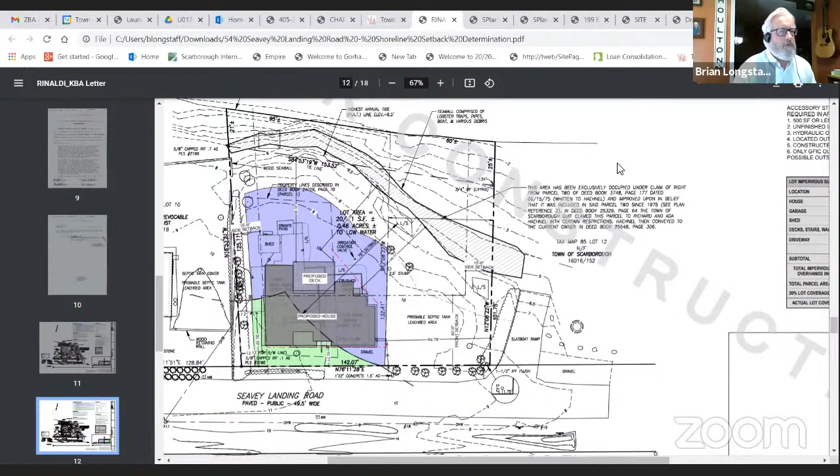Excuse me, Mr. Chair, can everyone see on the screen the plans for this project? Yes, they're up on my screen. Just wanted to make sure. Thanks, Brian. I'll put it to the board. Does the board have any questions at this time that they would like to ask while we have Mr. Browne on the line?

Pardon me, Mr. Chair. Mr. Karen: Just for clarification and the record, Mr. Browne, when developing this plan, were there other considerations or locations taken into the planning?

Not really, because there's only a little triangle of the lot that has the ability to be 2 stories, and the goal for the house was a 2-story house for at least part of it. So we really were trying to nestle it in as much as we could into that corner where we are allowed a little bit more height. So that's kind of where we decided. Plus, there wasn't really much room to go left or right anyway. But we can't really go any closer to the road.

All right, thank you. It sounds as if there was some thought elsewhere on the site, but that just makes the most sense. Other questions?

Well, I know we don't really have any criteria specifically for this type of determination, but I do know that when I look at it, we're supposed to be determining what I feel like somewhat our criteria, which is the size of the lot, the slope of the land, the potential of soil erosion. I just want to make sure that we are addressing all those this evening. I did get a chance to review the application and the information in it, but I just wanted that we could comment on real quickly, I think for all the board, some sort of criteria here in regards to, I'm just looking at the second page of Brian's memo, which lists out the zoning board and this designee shall consider the size of the lot, the slope of the land, the potential for soil erosion, the location of other structures on the property and on adjacent properties, the location of the septic system. And I know that this was a task that was pushed over by planning board. And one of the things is vegetation to be removed and to be relocated. I know that was a big thing with planning. So maybe if they could briefly speak to all those, I think that might be helpful.

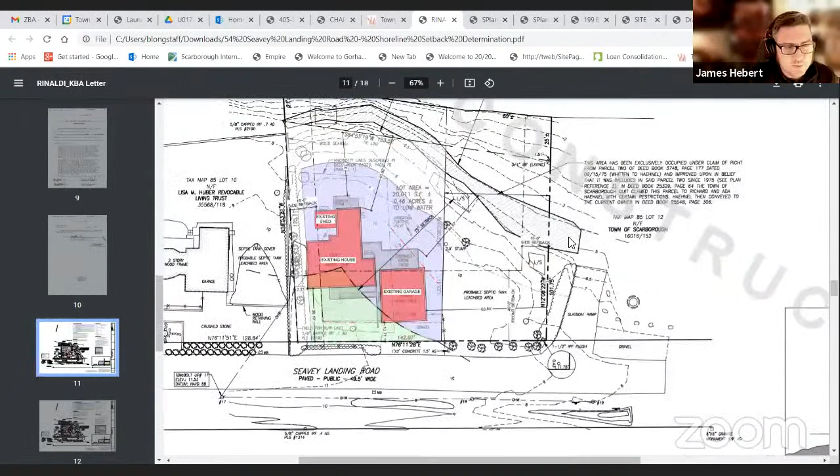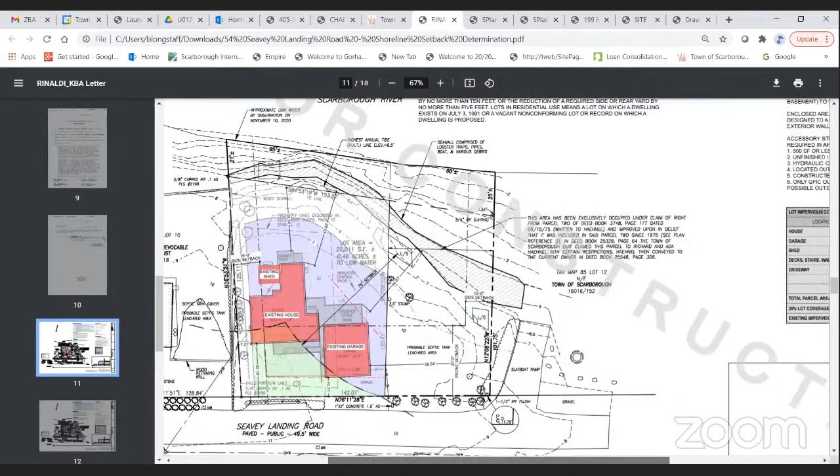Sure. Yeah, I think with the survey, you could kind of see where the topography slopes down once you get closer to the water. Where we've located the house is similar to where the house is located now. And some of the other things we have with this is we're not disturbing soil outside of where the existing footprint would be, is the goal. And as construction would start, we would be following all the erosion control measures that we're bound by with all this. But I think the goal was the excavation would really happen over a good chunk of the, once the existing house and garage are removed, you could see our new footprint kind of covers over most of that. So that was part of it.

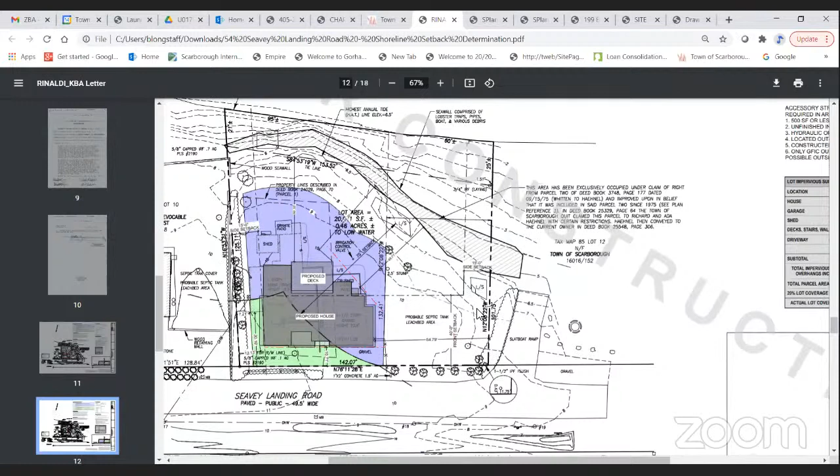And we did take the slope of the land into account - it's really the flattest where the house is currently versus if it was closer to the water, you start getting into more of a slope as it goes to the water. So those are some of the considerations that we took into account, not disturbing more of the landscape around the existing house than we needed to.

I have a question related to what is the foundation on the current building, and its condition. Can you describe that a little bit further? Yeah, the existing house has a full foundation under it.

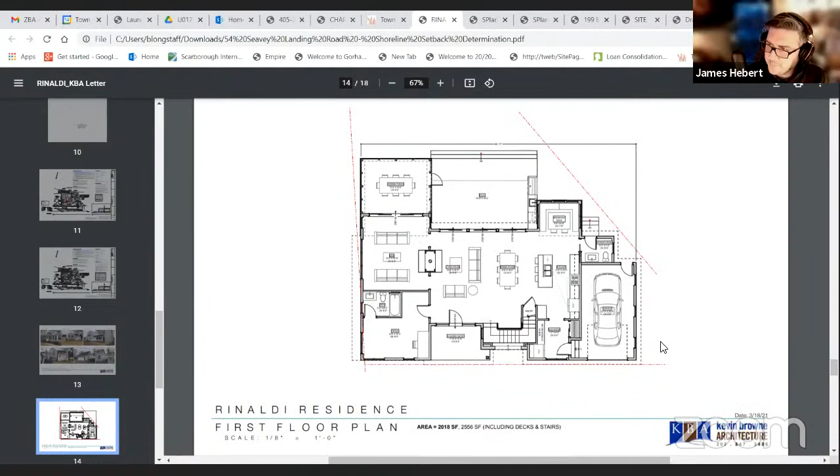The garage, I believe, is just on the slab. There's some extra structures that you can see in the pictures here that have been added on over the years. But the existing house does have an existing full foundation, which we would be removing and putting basically, I think it's going to be on piers, either piers or a very low foundation - with the flood zone, there's certain foundations that are allowed. Yep, so that's kind of what we're going to be putting back. Okay.

Other comments or questions from the board?

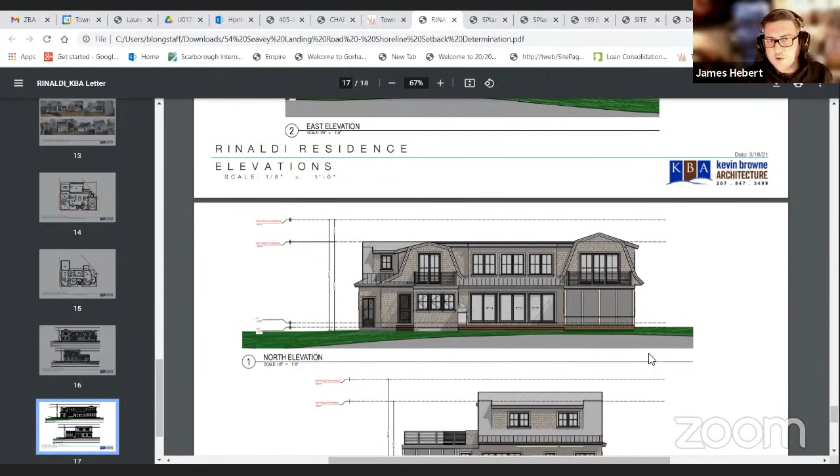I think one item worthy to point out is that it appears, Mr. Browne, that you're trying to make the new structure that is coming in less non-conforming than the existing structure. Is that correct? That's correct. Okay, and that's something that with a lot of these older properties we like to see on the board. It's just an effort to make a non-conforming structure less non-conforming.

Does anyone have any other questions or comments from the board? Okay, seeing none. Mr. Longstaff, at this point, do we check if there are any letters written from the public on this? You can do that now, or you can do it when you open the public hearing. I can tell you that we received no phone calls, no letters, no emails on this project.

Okay, and I guess with— yes, sorry, Ms. Shupe? No, it's okay. Someone's raising their hand as an attendee. I don't know if that's on purpose. That's okay. Well, I was just about to say we can open the public hearing right now, so if there is someone in the Zoom chat that would like to discuss, we can bring them in if possible. And their hand is down and they're gone.

Okay, seeing no folks from the public who would like to speak on this, I guess, Brian, our next steps with this would be—is this a straight up and down vote on the setback determination? Yeah, I think you can go member by member and gather comments and their thoughts on whether or not this proposal meets the setback to the greatest practical extent. And that would require a motion, a second, and a full vote. Is that correct? Yes. Excellent.

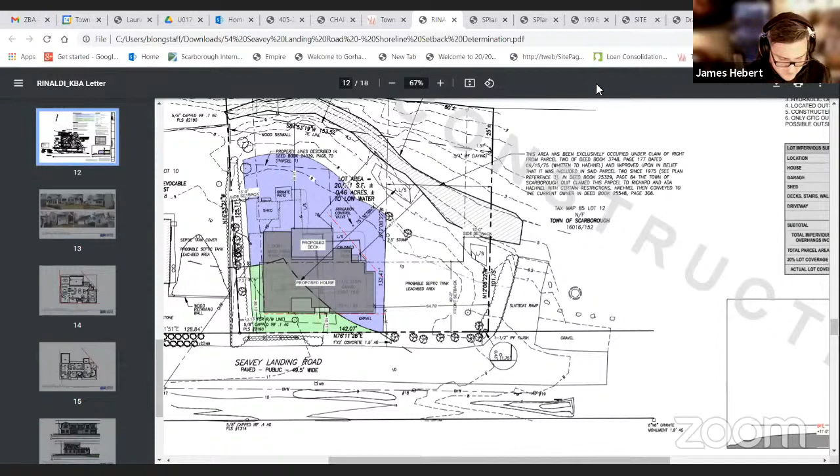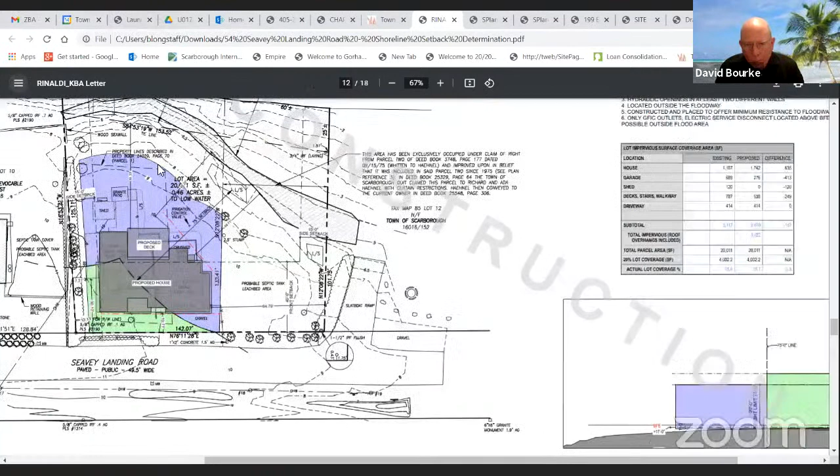What I'll do is go through each member for their comments on the setback determination for the record and their vote. So, Mr. Bourke? Yeah, I think this certainly improves the location of the building and also brings it up to code. So it's a significant improvement over what's currently there. It actually brings it further away from the shoreland, the problems. So I think in every way, this certainly meets all the criteria that we are looking for.

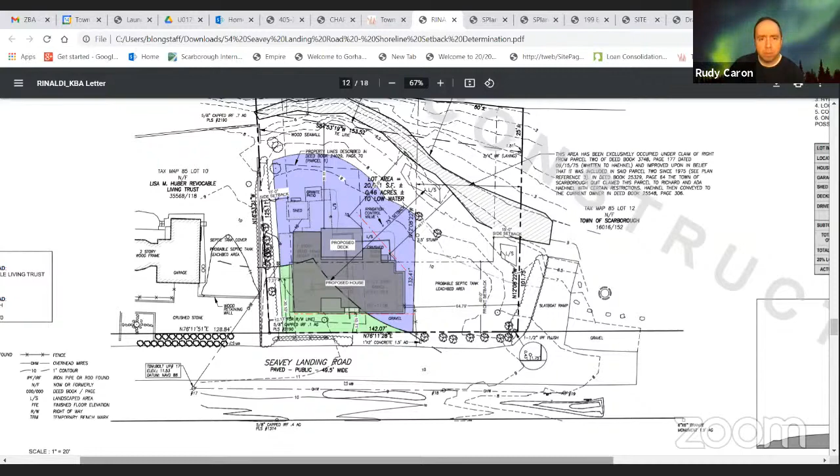Mr. Caron? I too believe that this meets the criteria as discussed, as Mr. Bork stated, and there is a reduction in distance, a reduction in the footprint based on the sketch that we can see, the existing and the new on top, as well as a greater extent or distance away from the shoreland, the edge of the water itself. I'm in favor of this and don't have any concerns.

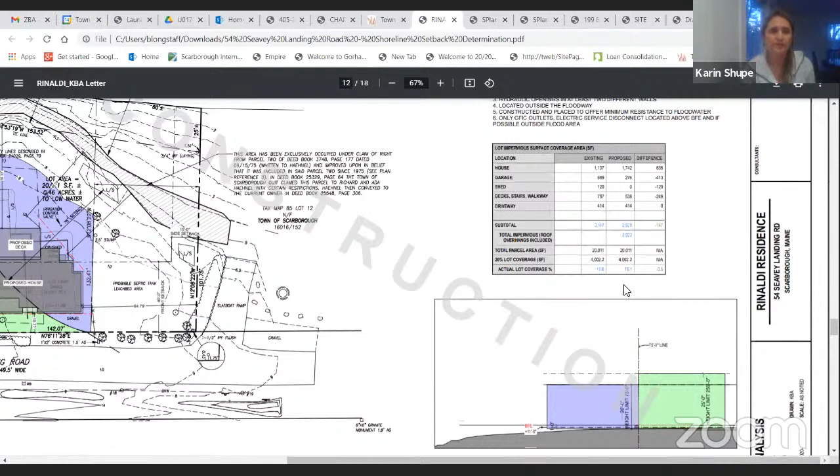Excellent. Ms. Shupe? Yeah, so I'm in favor of this and I will be voting yes. Anytime someone is trying to come more into conformance with the ordinances and the zoning rules that we have, that is great. They hired a professional firm and they've obviously done a lot of thought and process into what they need to do to use the best land they can. And I think, as we've seen, this is the trend with raising the homes and trying to get them farther away from the ocean and having them sustainable for longer.

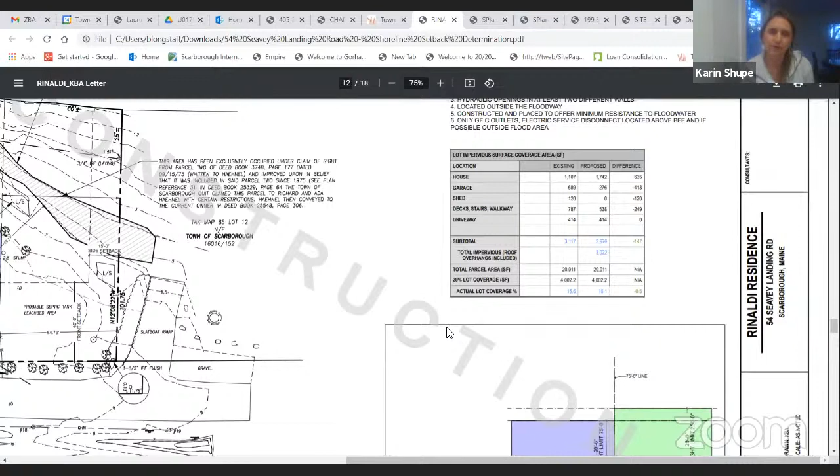So yes. Excellent. Mr. Howe? Well, I think it's been covered. I mean, a lot of work went into this and certainly an improvement further away from the water. I'm voting yes on this.

Okay, and Mr. Fralinger? Yeah, I'd reiterate what's been said, but I think it's important to note too, the lifting of the house and the base structure is now going to be conforming with the floodplain requirements, and obviously that's a key consideration for a shoreline setback, and I think it's a very thoughtful approach. So, yes, no problems. Excellent. Thank you, Mr. Fralinger.

And I will also agree with this because, as I previously stated, any non-conforming lot, any improvement to the lot that makes it less non-conforming is something we try to take into account when folks are trying to update their properties. So to maintain what we have done in the past, I will go through each of you for your vote.

Mr. Bork, how do you vote on this? Yes. Mr. Caron? Yes. Mr. Howe? Yes. Ms. Shupe? Yes. Mr. Fralinger? Yes. And I will vote yes as well.

So the setback determination passes, and you're all set, Mr. Brown, Mr. Rinaldi. Thank you for your time. Thank you. You're very welcome.

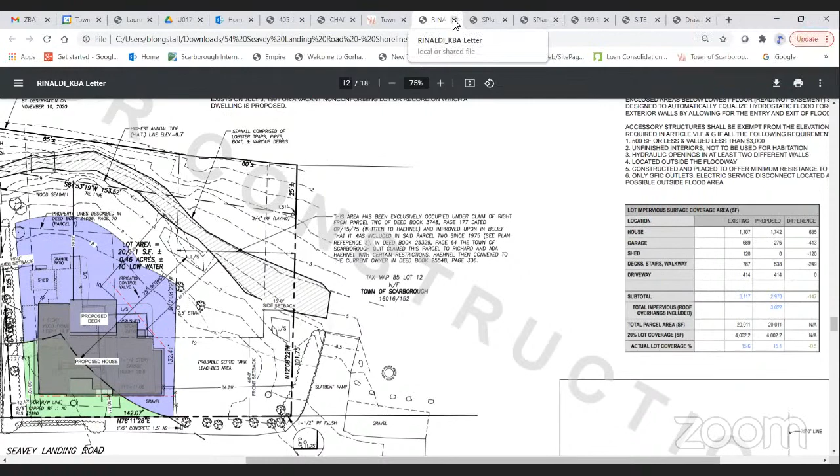Now, before we get started into the remainder of the agenda, I wanted to address one item I forgot to mention at the very beginning, just a few opening remarks as we go into these appeals. So forgive me for not mentioning this earlier. In each instance of the appeal brought before us, the burden is upon the applicant to demonstrate compliance with each of the criteria or provisions in the applicable appeal being discussed this evening.

The board is going to ask questions as necessary to understand the nature of the appeal as fully as possible. When all the testimony has been heard, the chairman, myself, will close the record, and the board will adopt findings of fact for each criteria of the appeal and vote to determine if the applicant has met the burden of proof necessary to meet that criterion.

It's important to know that if any of the appeal or special exception criteria have not been met, then the board must deny the appeal or application. In many cases, the applicant or landowner may have a personal problem which prompted the request for a variance. Please understand that this is not legally relevant to the appeal, no matter how sympathetic we, the board, may be to the appellant's situation.

After the board votes on each merit of each criteria, a motion may be made to approve the appeal, and if there is a second, discussion will follow. The board will then state conclusions of law based on the findings of fact to support a decision on the motion. In most cases, the board will request that staff prepare a draft written decision based on the stated findings and conclusions, as well as the audio, video, and supporting materials on the record for approval at our next meeting, as we demonstrated earlier.

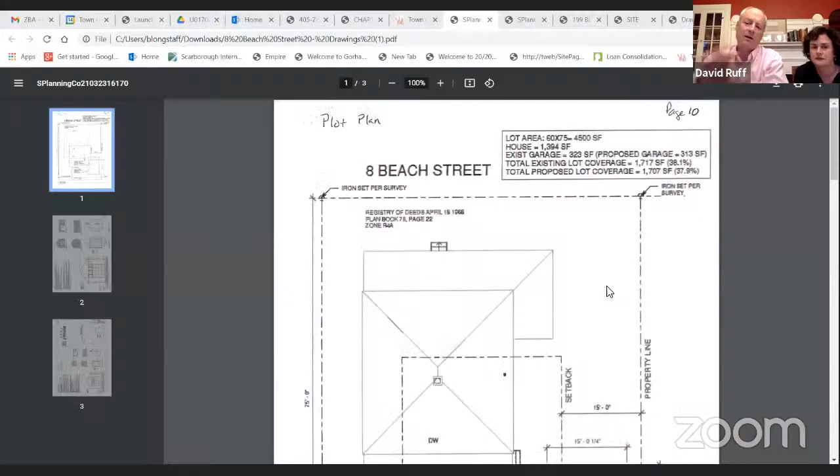I think it's pretty straightforward, as Brian had talked about. We started by trying to investigate the single car garage that's there, and off to the side, the kind of jut out is actually an old outdoor shower and 2 changing rooms that are all roofed over within the garage area, with the intention of repairing that, which would have been the simplest approach to take.

In consultation with Bill Royal, who is doing a bunch of the work on our house now, we really determined that the ability to pick up the structure, replace the bottom probably 18 inches of that, and pour a foundation, because it's sitting right on the sand at this point, was really not viable, because just the act of picking it up would probably cause the building to just fall apart. It's not all that well built there.

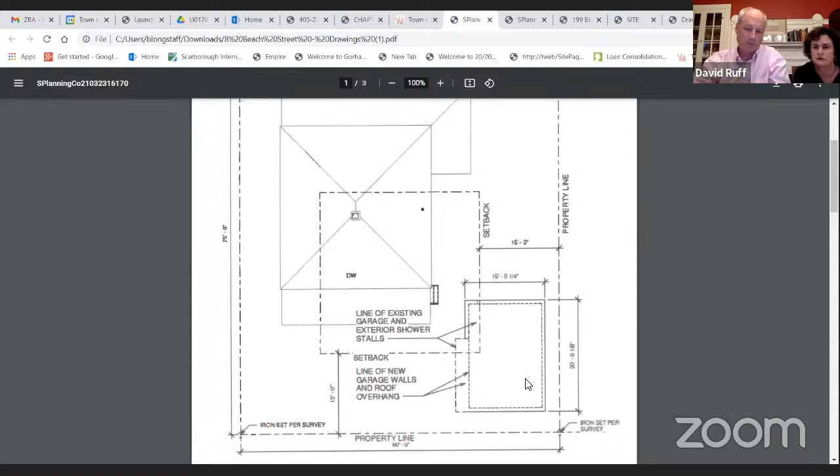We then met with Linda Braley, who is an architect who's drawn the plans that you're looking at. And through both of them, the suggestion was made to get rid of the odd piece that sits off to the side, slightly reconfigure the structure, as you can see in the plans, and essentially keep it in the same spot.

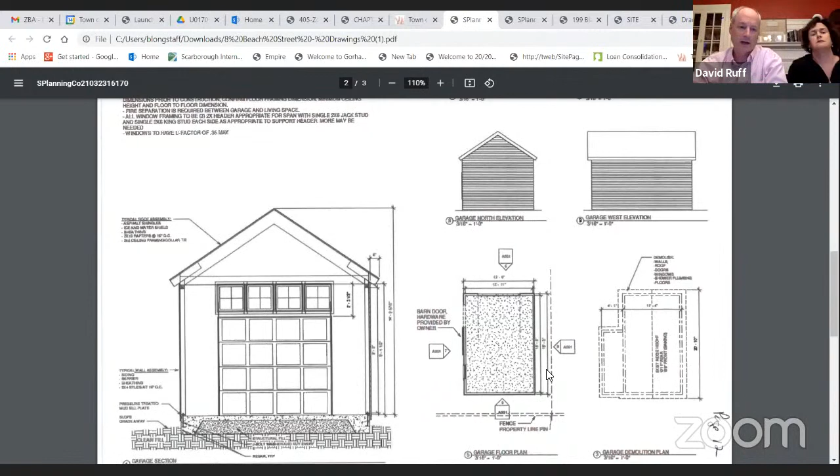So the wall on the side running parallel with the McCalman residence next to us would stay in the same spot. The wall in the back, up to the Guzzi residence, would stay the same. And then it would become slightly wider with the overall area, taking off those other pieces and slightly reducing the footprint on the lot.

I would say the major reason we're looking to go slightly wider is that the advice we've been given is that it would make the building actually a little bit stronger, because currently the width of the overhead door essentially takes up the entire front of that, so there's no real way to put any strength into it. By widening it a little bit, we get more strength so that we don't face the same problem as you can see in some of the pictures of both the rot and the tilt that has occurred.

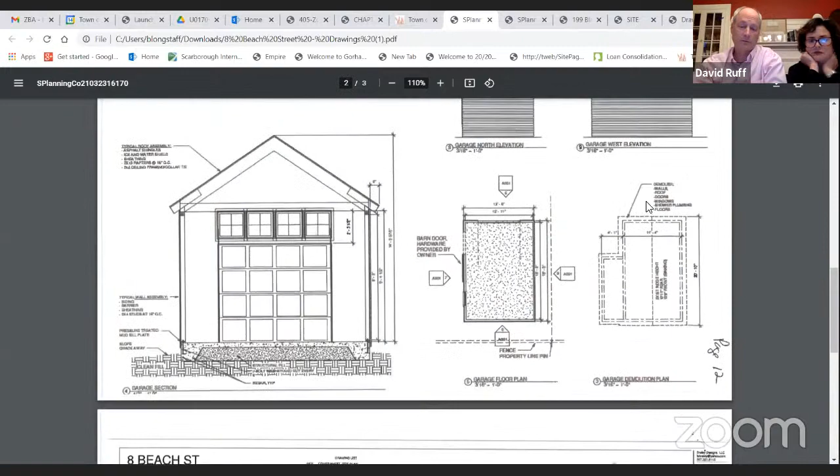Okay. Thank you for sharing. Are there any questions so far from the board regarding this practical difficulty application?

Okay, seeing none, what I'm going to do now, excuse me Mr. Ruff, is we're going to go through each of the criteria of the application one at a time. And what I'll ask is just you read your response into the record, just so that we have a recording of your response for the official record.

So question 1: the need for a variance is due to the unique circumstances of the property and not to the general conditions in the neighborhood. This variance is being requested due to the poor initial construction and current state of disrepair in this building. The general conditions of the neighborhood have not influenced the request, as we are largely maintaining the same location on the property.

Question number 2: the granting of a variance will not produce an undesirable change in the character of the neighborhood and will not have an unreasonably detrimental effect on either the use or fair market value of abutting properties. We will be replacing a garage already in existence. Two homes directly across from this location have garages of roughly the same square footage requested. The house on one side of this location also has a single garage. The house directly behind this location has a single garage. All of these garages exist in similar locations, largely out of compliance with current setback zoning requirements.

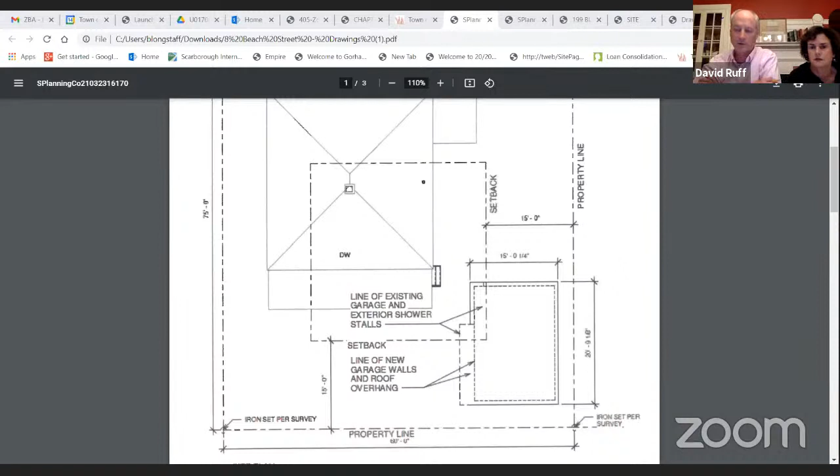Excellent. Number 6: the granting of a variance will not have an unreasonably adverse effect on the natural environment. Through a review of the GIS maps on the Town of Scarborough website, we have determined that the entire lot for 8 Beach Street is not in a flood hazard zone. Further, the location of the garage is not in a shoreland area.

Well, thank you. Number 7: the property is not located in whole or in part within a shoreland zone as defined in 38 MRSA section 435, or flood hazard zone as defined in the Town of Scarborough floodplain management ordinance. Yes, and through review of the GIS maps on the Town of Scarborough website, we've determined that the entire lot for 8 Beach Street is not in a flood hazard zone, and further, the location of the garage is not in a shoreland area.

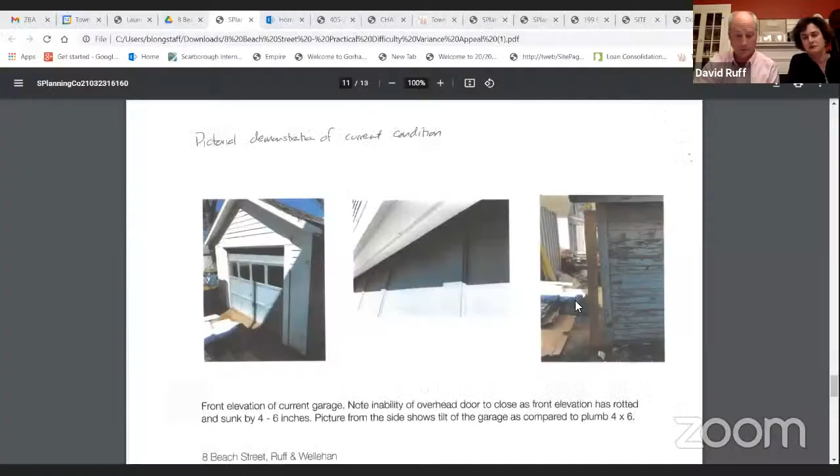Thank you. And number 8: please demonstrate how the strict application of the dimensional standards of the ordinance to the property for which a variance is sought would both preclude a use of the property that is permitted in the zone in which it is located, and would also result in significant economic injury to yourselves, the applicant. This property is currently a personal home, and we will not be changing the use of this property through this application. This property is permitted for home usage. If we are unable to get a variance to rebuild this garage, our use of this space to store and maintain various outdoor equipment would diminish. In addition, the property value would decrease significantly for future owners who would not have outside storage for various needs. We do not intend to change the uses of the property or the garage we are looking to replace.

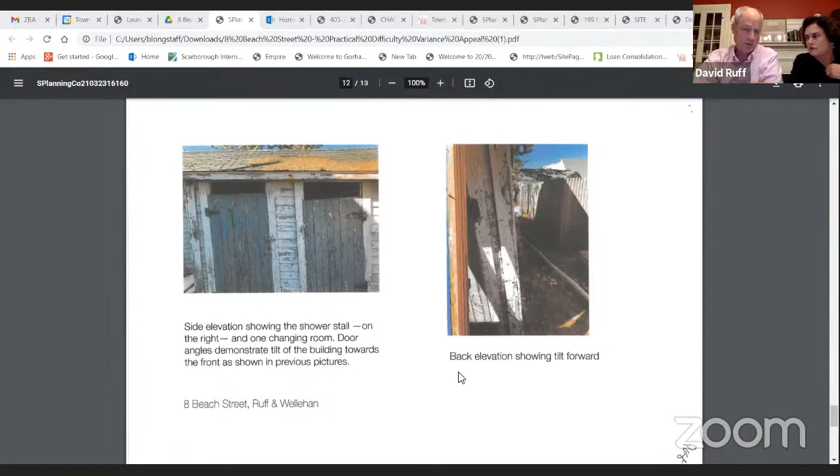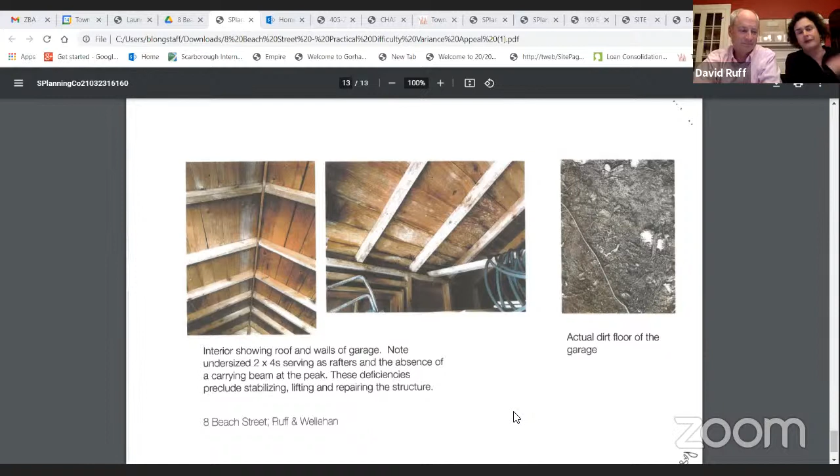Sure. So seeing as we're going to be in the same spot that it's at right now, it's not going to have any impact on the natural environment that's there. I can't argue that I am a naturalist expert on that, but I don't think it has any impact on animal usage or personal usage or anything along those lines. And we're not looking to change the dynamics of the ground there. It's actually going to be in the same spot where it is right now. And I think by reducing the footprint even that little bit, it's just more spots where the rain comes down. We'll be planting around it, and we'll add less roof zone and more green. I know in Scarborough that's very important.

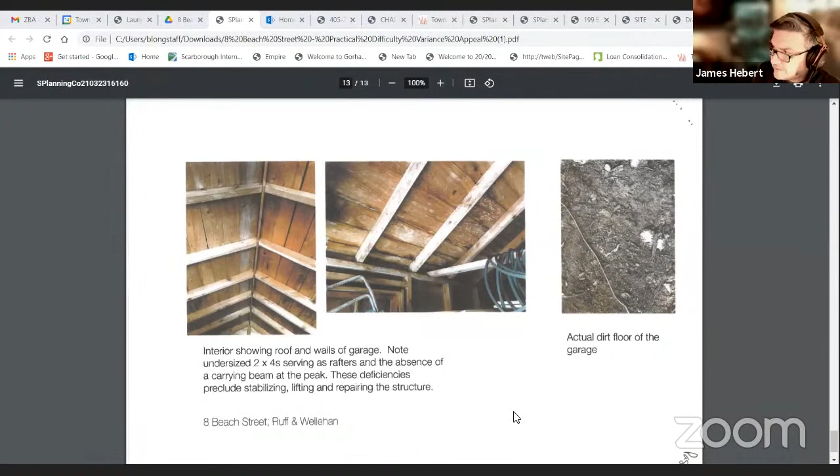Excellent, thank you. Following up on that, are you planning to have any running water, sinks, or drains in this garage? We are not. Okay, so are you planning to run electrical out there? We are planning on running electrical out there. Yep, that's fine.

So usually on questions like this, we want to see if the construction is going to have an environmental impact. If you were going to put in a sink, we'd want to know where that would drain. Seeing they're not having a sink here, that question isn't necessary.

If I might add, it could even be less than the current uses right now. There is an outdoor shower which is just drained right into the ground at this point. We haven't used the shower, but for years it's been running there, just running into the ground. Excellent, and that is being removed, you said? Correct.

Okay, are there any other questions from the board? Okay, thank you both very much.

I think now we will go into the public hearing portion of this application. Mr. Longstaff or Doreen, is there anyone in the public who would like to speak on this matter, or have we received any emails or letters from any abutters or folks regarding this application?

Yes, Mr. Chair, we've received three letters or emails on this particular appeal.

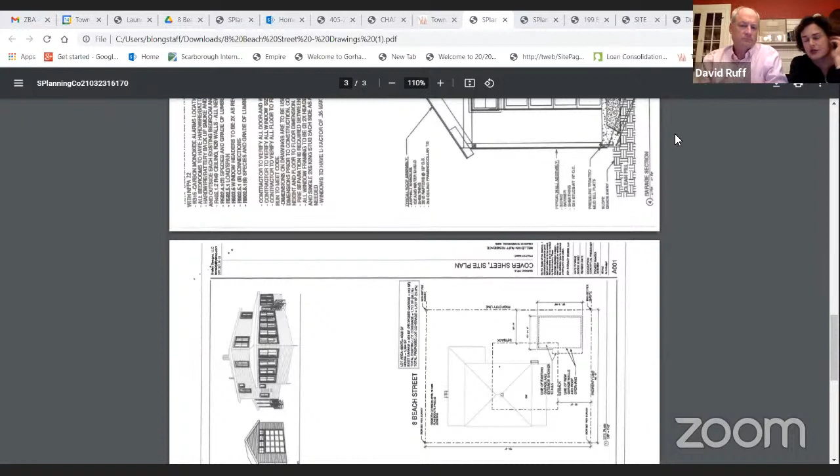I'm trying to remember, it's not on our property, so we wouldn't be touching it. It sounded like she was maybe worried about a root. Those pine trees have typically extremely shallow roots. We're not moving that edge of the garage at all. And she also has extensive gardens, and we want to be able to leave those right where they are, so I don't perceive that it would be a problem at all.

Okay, I'll take a poll from the board. Any last questions or comments for the applicants? Okay, seeing none, we're going to close the public hearing. Thank you both very much. Now the board is going to deliberate and discuss each of the criteria on the application.

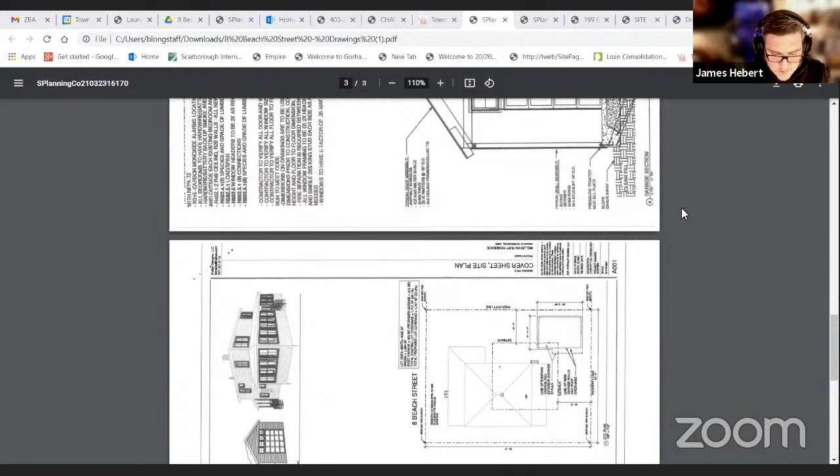So number 1, the need for a variance is due to the unique circumstances of the property and not to the general conditions in the neighborhood. We'll start with you, Mr. Bork. This is an extremely small lot, and I'm not really sure if all the lots in this neighborhood are the same size, but I will assume that this one is significantly smaller than others. So it is a unique property, if I can make that assumption. And when you look at the non-conformance on the lot, there's really not a whole lot you could do other than replace the 80-year-old garage with a new one. I think that seems reasonable. It's about the only action they have.

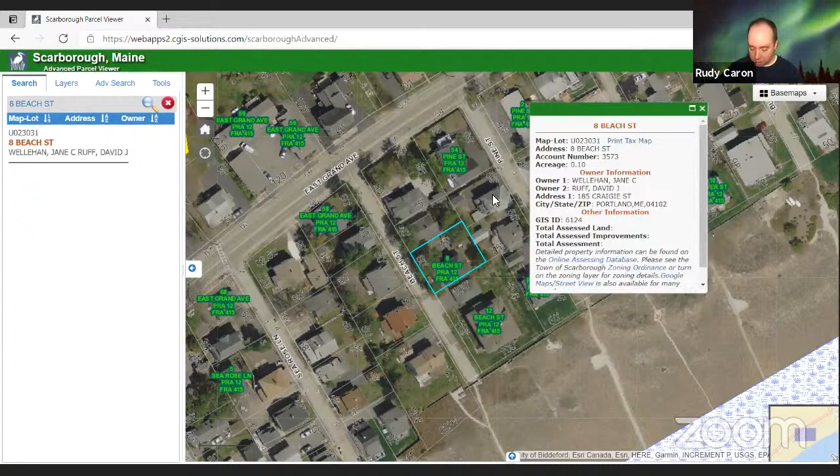Thank you, Mr. Bork. Mr. Caron? Are you also muted, Mr. Caron? Sorry about that, Mr. Chair. It's okay. What I was saying is that with the site plan provided and the documentation, it's clear to see that with the building setbacks on the existing site and the existing house and primary residence, it would be impossible to provide a garage, a single car garage, elsewhere on the site. So this does make sense, and as mentioned, it is a reduction of what is currently there.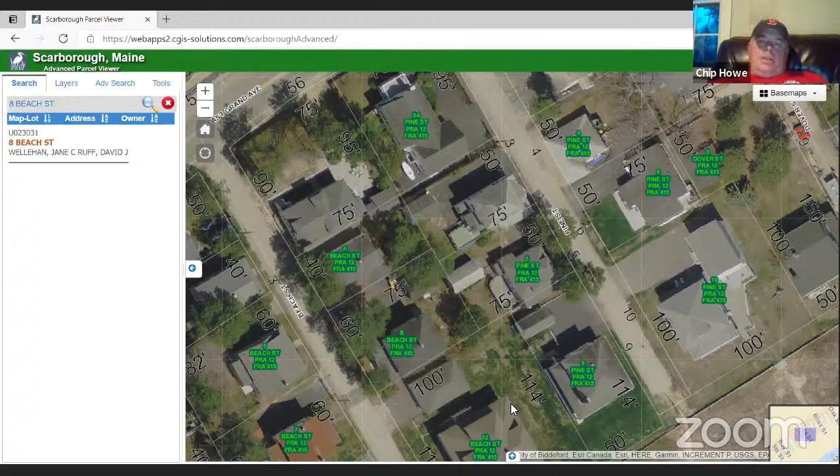Excellent, thank you. We'll go to Mr. Howe. Certainly an improvement. What's there is in pretty rough shape, and they're removing the shower, which is now draining into the ground. So that is certainly an improvement.

Excellent, thank you. Mr. Frolinger? Yes, I'd reiterate Mr. Bork's comments, but I also point out that for them to reconstruct any form of garage on the property would require some sort of a variance given the size of the property and the nature of the lot. So what they're proposing seems to be the only way to recover use of a building that is effectively in disrepair.

Thank you, Ms. Shute? I agree with most of what the board has said, and the applicants also provided photos of the current condition of the garage, which is unique compared to the other garages in the area at this time.

Excellent. I'll say the property is not unique in the aspect that there are many lots in this area that are non-conforming, no matter how you look at it. But it is unique in the situation where this is a building that is approximately 80 years old, not very well maintained through its later years, and therefore it needs to be replaced because it can no longer be effectively maintained. That response will tie into another question we'll mention later. But I guess, seeing that, we'll go on to number 2.

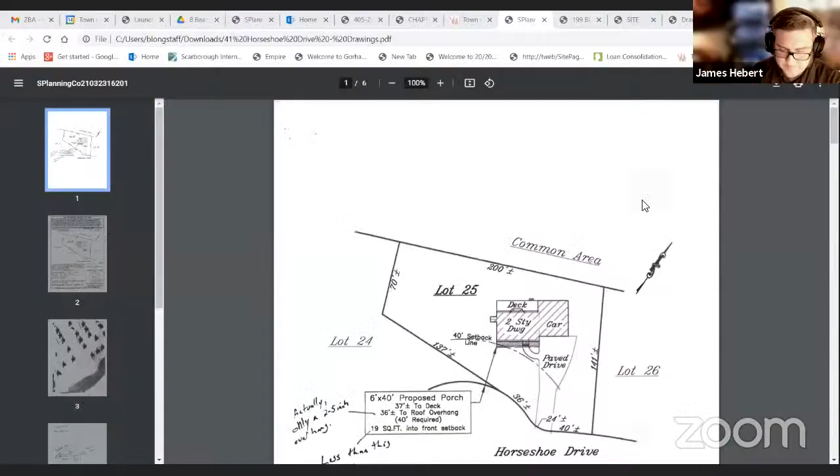Well, like Brian had said, just trying to add a farmer's porch to the front of the house, and we're on a cul-de-sac, so it just cuts off that left corner of it. If you're looking at the image right now, just trying to go through the process. Not sure what else to say about it, pretty straightforward. Sure, can you provide us with the exact measurement of relief that you're looking for here? For 4 feet. It's a 4 foot variance. Okay, excellent. Yep, thank you.

I guess at this time, what I'll do is go through all of the 5 criteria, and I will ask the questions, and you will answer them based on the answers that you've given us in our packets. That way we can read it into the record, so it's official. Number 1, the existing building or structure on the lot for which the limited reduction of yard size residential is requested was erected prior to July 3rd, 1991, or the lot is a vacant non-conforming lot of record.

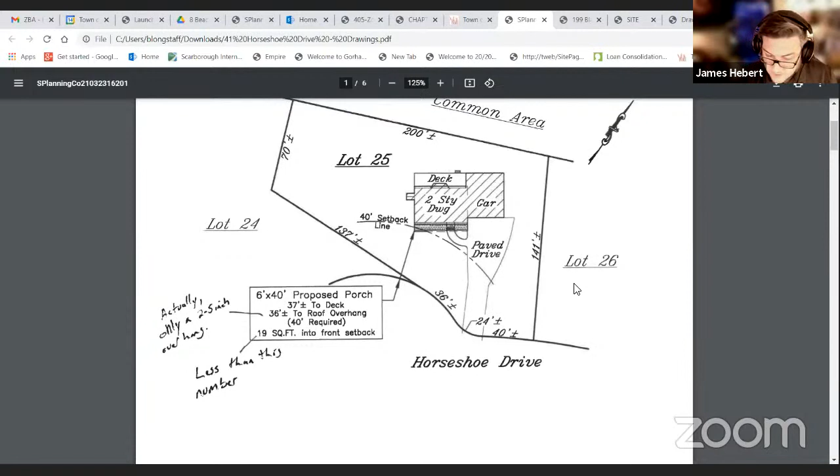And you could just read in what your response was. Yeah, I don't actually have that in front of me right now. So, in your application, you stated the home was built in 1986. Is that correct? Right, that's correct. I guess, do you have a copy of your responses in front of you by any chance? I don't, unfortunately. No, okay, I don't have it in front of me.

I guess going forward, we'll continue asking the questions, and I guess, Brian, do we restate what was provided in the application? And you're on mute, Mr. Longstaff. Yeah, I was just looking for the application myself.

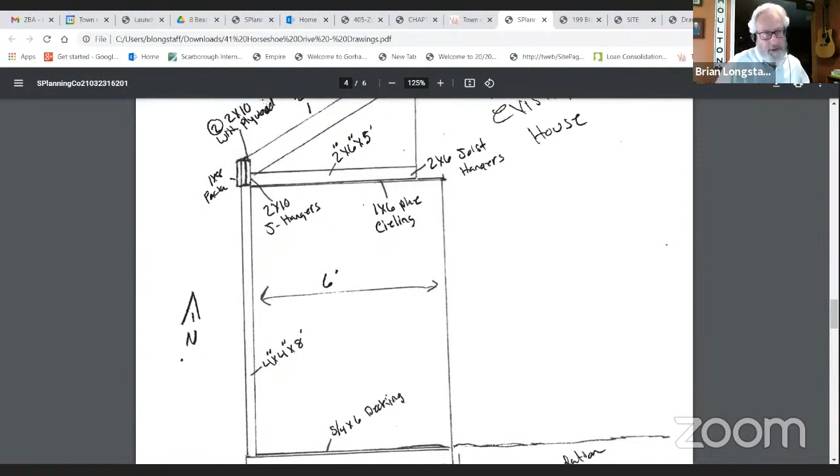Sounds good to me. All right, we'll move on to number 2, Mr. Hebert. The requested reduction is reasonably necessary to permit the owner or occupant of the property to use and enjoy the property in essentially the same manner as other properties in the same zoning district. Absolutely. One of the big reasons for this is so that we can sit on our front porch and watch our kids play, because they play in the front yard, not in the backyard as much. So we just want to be able to watch them and keep an eye on them.

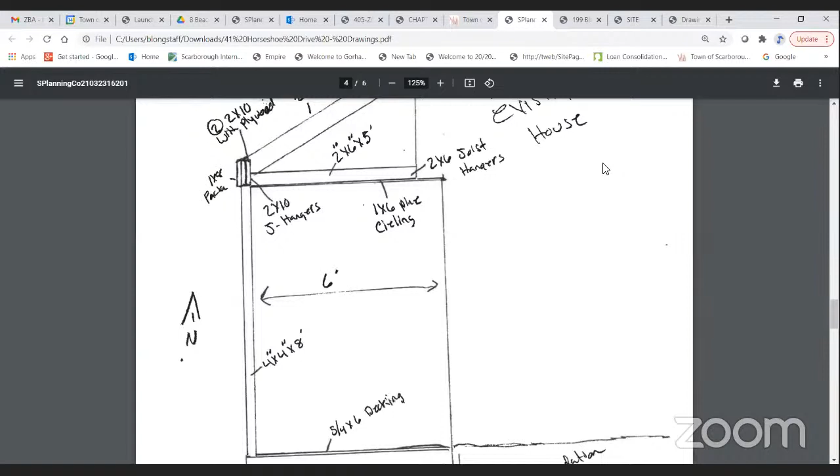Excellent, thank you. Number 3: due to the physical features of the lot and the location of the house on the lot, it would not be practical to construct the front porch or the enlargement to the structure in conformance with the currently applicable yard size requirements. Yeah, correct. I mean, because of the curvature of the cul-de-sac, it just cuts off that corner. It would just look silly if we didn't pull the front porch all the way to the end of the house.

All right, thank you. Number 4: the impacts and effects of the enlargement, expansion, or new building or structure on the existing uses in the neighborhood will not be substantially different from or greater than the impacts of a building or structure which conforms to the yard size requirement. Correct. Yeah, I think it's gonna look great. I frankly think probably other people in the neighborhood will want to do it in the future.

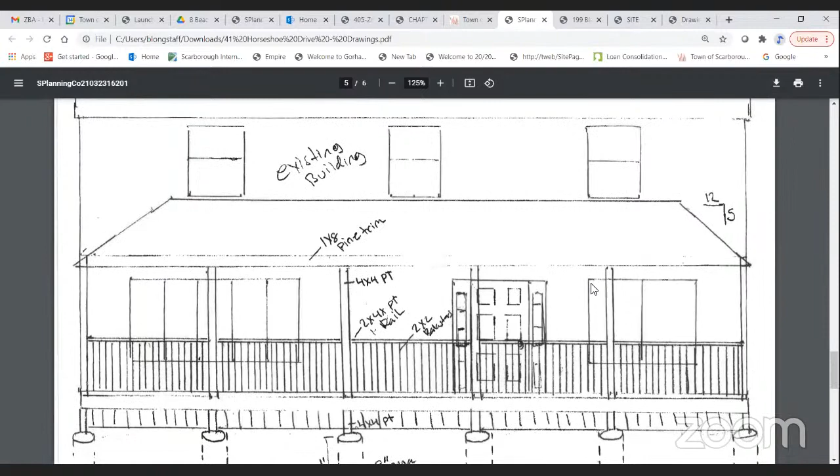All right, great. And number 5: the applicant has not commenced construction of the enlargement, expansion, building, or structure for which this limited reduction in yard size is requested, so that the Board of Appeals is not considering an after-the-fact application. So you have not begun construction, is that correct? Correct. Excellent. You can verify that through the town, Brian? Yes, he actually applied, and we had to deny the application until he could get a variance to build it. So that's what he's waiting for.

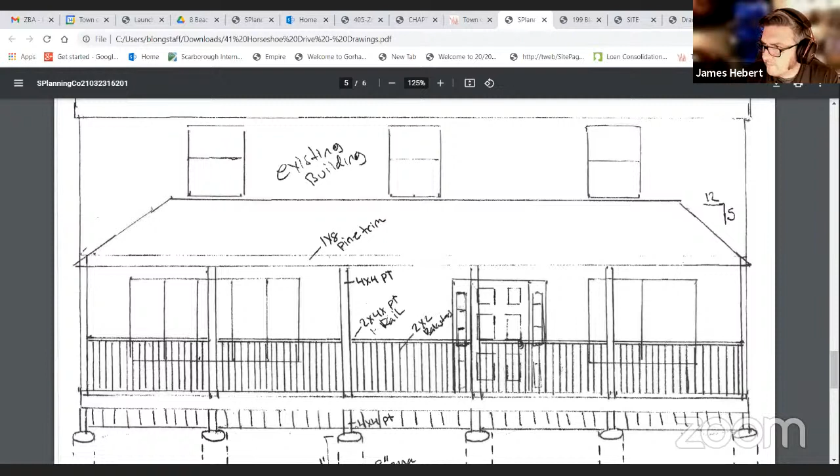Excellent, thank you. Okay, are there any questions for the applicant from the board members at this time? Yes, Mr. Chair. For the applicant, I was just curious — I'm not really familiar with the area, and I didn't know if there were other properties in the area that had those type of porches. I know that you were limited because of the cul-de-sac. I didn't know if there were other properties that had front porches.

Yeah, there are some properties that have the front porches. I know there was a home on Nonsuch Cove Road, one street over, that just did the same thing — they added a front porch on the front of their house. But in the 80s, they weren't doing as many of these front porches, and now more of the current construction and current designs add front porches, and I think they really add a lot of curb appeal to the house and the neighborhood. Thank you. Other questions from the board?

Okay, seeing none, we're going to move into the public hearing. Is there anyone from the public who would like to speak on this? Brian or Doreen, have we received any emails or letters regarding this application? Mr. Chair, I have not received any emails or letters on this application. Okay, thank you. I guess at this point we will close the public hearing.

Thank you, Mr. Lavoie. Now we're going to go into our internal discussion and discuss each of the following points of the application. So number 1: the existing building or structure on the lot for which the limited reduction of yard size residential is requested were erected prior to July 3rd, 1991, or the lot is a vacant, non-conforming lot of record.

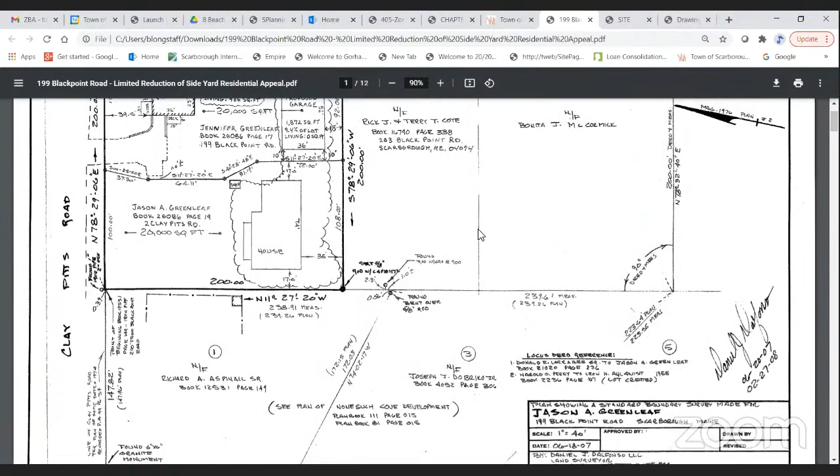Longstaff said, in performing the due diligence from a design aspect, I contacted the Public Works Director, Mike Shaw, to discuss some of the issues that I saw, being a former civil engineer and understanding that drainage constraints and the impact on abutters might be a concern, and that of Black Point Road in the positioning of the driveway that I would need to access this building off from Black Point Road. So Mr. Shaw came down and met with me on site.

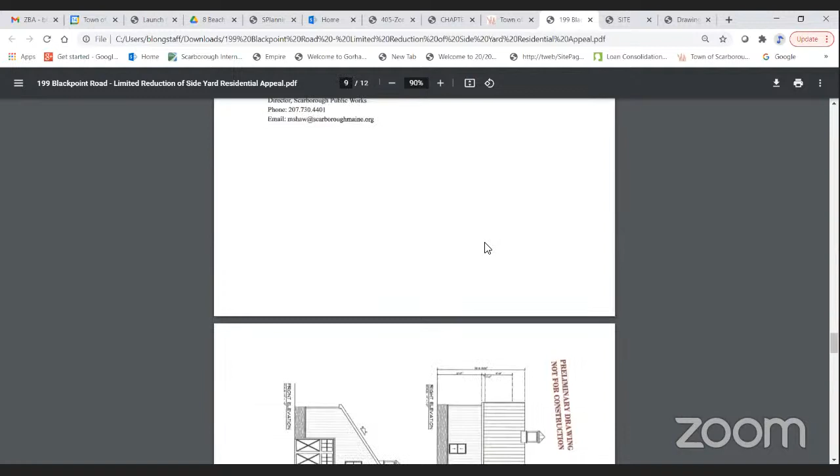There is a picture that I provided in your packet, and I know that picture is a little difficult to understand the constraints, but as Mr. Longstaff scrolls on, you may see a picture. Apologize for the orientation here. But there's quite a significant reduction in grade along the proposed area of the building. As you can see here where he's pointing, there's roughly about a 6-foot drop in elevation over 75 feet, which would potentially not only have adverse drainage issues on my lot at 2 Clay Pits Road.

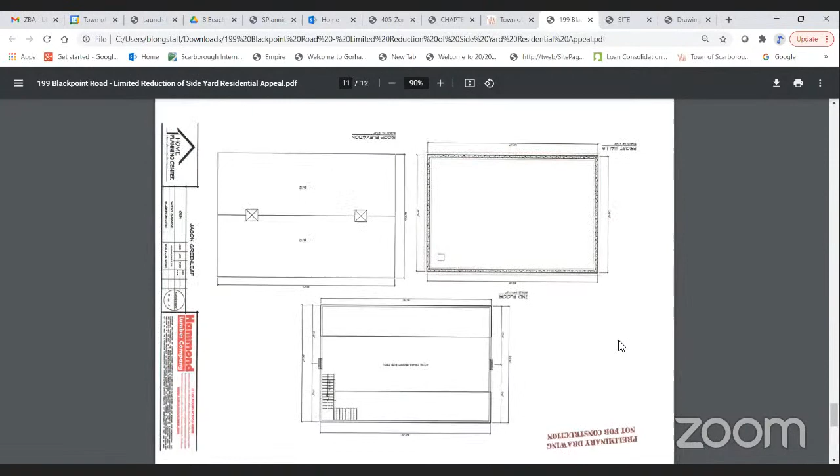So in my discussion with Mr. Shaw, he agreed with my original concerns, and he suggested that I speak with the zoning administrator, Mr. Longstaff, to see if there was a possibility of changing the orientation of the building 90 degrees with the long side actually perpendicular to Black Point Road, as I've shown on the attached plot plan that Mr. Longstaff is getting to now. I believe it's page 1, Brian.

So this would reduce the width and the length of the proposed driveway in off from Black Point Road by putting the short side parallel to Black Point Road. And it would certainly allow more options to mitigate the drainage concerns that we had, both myself and Mr. Shaw. I've also included in your packet a letter from Mr. Shaw, if you saw that, that outlines his recommendations as well.

Following my meeting with Mr. Shaw, I contacted Mr. Longstaff. He graciously came down the next day and met me on site, and we discussed the concerns that we had. Mr. Longstaff understood the drainage concerns and agreed with Mr. Shaw that this could potentially cause some problems, not only from a drainage perspective, but also I think one of the main aspects here is that the architecture of the building, trying to make it as architecturally pleasing as possible, aesthetically pleasing, and the ability to move this and reorient the building would allow me to reduce the overall height of the building with setting it lower in elevation.

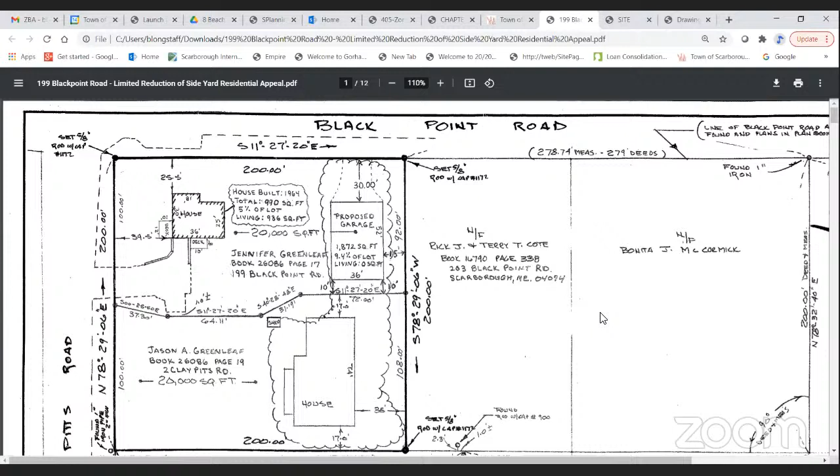To follow up, do you propose to add existing vegetation then? I do, yes. I'm going to be looking to provide a buffer. The home on the property is a rental property, so to create a buffer between the home and the proposed garage, I will likely be retaining as many trees as I can, and also adding some arborvitae or other buffer trees, or relocating some trees in the current area to help provide a buffer there.

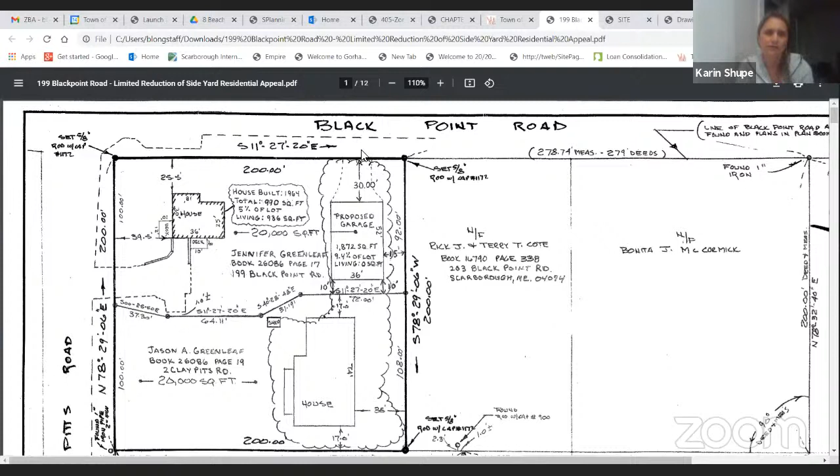Thank you. Welcome, I had a question. I'm sorry, I lost internet connection at one point, but right at the end, Mr. Greenleaf, you made a comment that it's not actually 30 feet from Black Point Road, it's actually 45. Can you just clarify? Yes, certainly.

So the existing property line, as you can see, is at the lower half right now. Mr. Longstaff, if you could back up with your cursor. That is the edge of Black Point Road, and the edge of Black Point Road is about 14.5 feet from the edge of the property line, so there is some setback there already. So from the property line to the proposed front of the garage would be 30 feet plus the additional 14 feet from the property line to the edge of Black Point Road. Okay, thank you. So overall, that would be about 45 feet from the edge of roadway.

Excellent, thank you. Other questions or comments from the board? Mr. Chairman, I've got two questions. One is about this actual schematic that Brian has up right now. Mr. Greenleaf, there's what looks like might be tree cover, or a bubble diagram around the house and the proposed garage. Could you just explain what that is meant to describe?

Yeah, essentially that area was the existing wooded area, and it's defined in that area as being not lawn and finished grading area. That's actually, as you saw in the picture that Mr. Longstaff put up that I included in the packet, that area is currently forested with trees. And that's how it was depicted on the original drawing of the plot plan and the proposed lots.

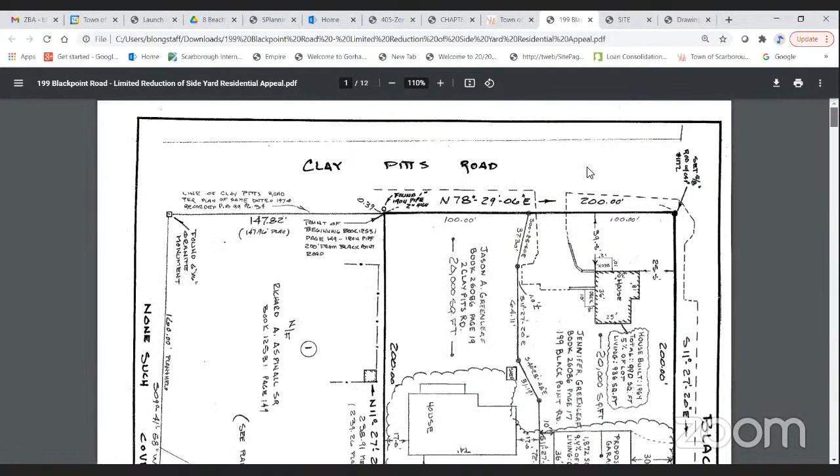I actually own a boat that's about 40 feet in length, and currently it's placed in my yard outside. One of the reasons for constructing the structure would be to house that boat in storage. In order for the length of the boat and additional seasonal equipment that I have to service both my own property as well as the rental property at 199 Black Point Road, I really needed the size of the building to be able to fit that equipment. Got it, no that's helpful in understanding that. I appreciate it, thanks.

Other questions, comments from the board? I have one more. Yes. The scale of that garage, that's a very large outbuilding. It's 1,872 square feet. In fact, it's double the size of the house on that lot. Are garages of this size common in that neighborhood?

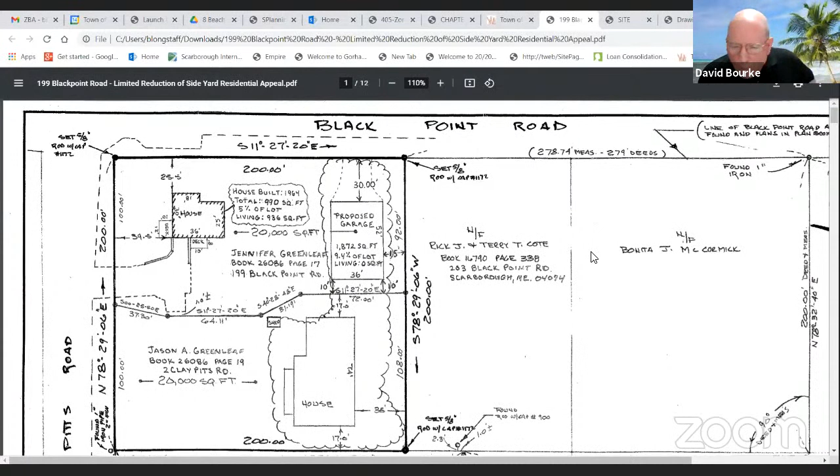There are actually, there's just 3 lots down, you have to forgive me, I can't remember the name, it's just changed hands. There is a large agricultural structure down there. I don't know the exact footprint of the garage, but it's similar in size. It formerly held horses and other animals. There are several garages in the area that are of similar size.

Excellent, thank you. Other questions or comments from the board? Okay, we're going to move into the public hearing portion of this appeal. If anyone in the audience would like to raise their hand, we can bring you in to discuss any comments that you would have on this particular application. While we're doing that, Mr. Longstaff, Doreen, if there were any emails or letters that we had received with regard to this application.

You are on mute, Mr. Longstaff. Sorry, you caught me mid-stride trying to share my screen here, so I apologize.

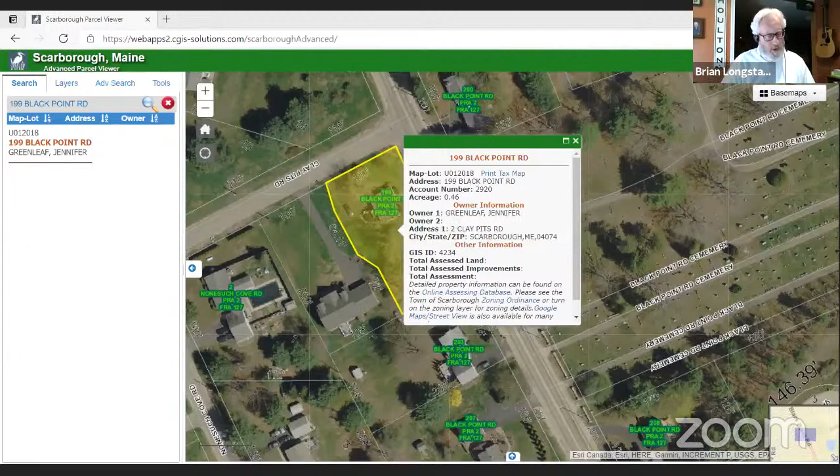There were no letters or emails on this particular appeal. Seeing no members of the public who wish to discuss, or anybody in attendance who wishes to discuss this, we will close the public hearing.

Thank you, Mr. Greenleaf. We're going to enter our discussion on the points of the application. Number one, and we'll start with you, Mr. Bork: the existing structures or buildings on the lot for which the limited reduction of yard size is requested were erected prior to July 3rd, 1991, or the lot is a vacant, non-conforming lot of record.

Yes, it was built in 1964. And that is confirmed by the warranty deed that was provided with us as well. Mr. Karen, do you have anything to add? Nothing to add. Mr. Freilinger? Nothing to add. Mr. Howe? Nothing to add. Ms. Shupe? The applicant has shown that the house was built in 1964 and they've attached the warranty deed.

Excellent. All those in favor of number one being met: Mr. Bork? Yes. Mr. Karen? Aye. Mr. Freilinger? Yes. Mr. Howe? Yes. Ms. Shupe? Yes. And I vote aye as well.

Number two, the requested reduction is reasonably necessary to permit the owner or occupant of the property to use and enjoy the property in essentially the same manner as other similar properties are utilized in the zoning district. We'll start with you, Mr. Bork. The applicant has demonstrated that there are other garages of similar size in this neighborhood, so yes, it would meet this criterion.

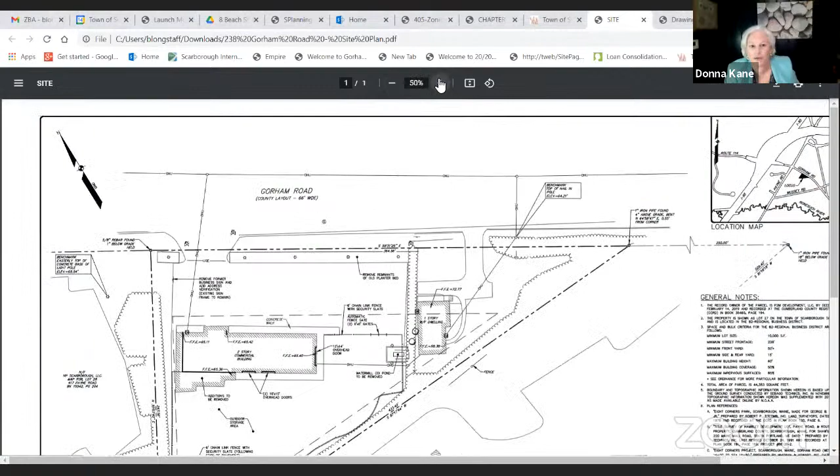That never happened, and so now the applicant wants to repurpose the building for maintenance facilities, as Mr. Longstaff said, for Pratt Abbott. This wouldn't be a site where the public would come, but the dry cleaning industry requires a tremendous amount of different types of equipment. The outdoor storage is for the vehicles they use. Typically there's 4 vehicles and an equipment loader, and those would be stored out in back. It's all on existing pavement.

They are proposing to add a chain link fence because there's been no occupancy in the building for a while. There's been a little bit of a problem with people getting into the back of the building and leaving things, so this is just to keep the building more secure. You'll see the heavy black line - this goes outside the outdoor storage, but there's been a series of additions added to the building. So those additions are coming off, yes, that's exactly right, and it's going to bring it back to its original size.

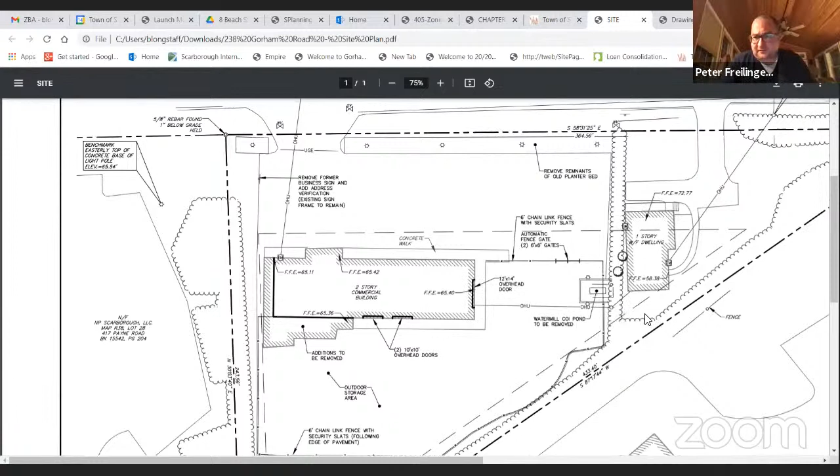Excellent, other comments or questions? Okay, so what I'm going to do at this point is ask you the questions A through I from the packet so we can read them into the record, Ms. King. So, standards for the special exceptions: the proposed use will not create unsanitary or unhealthful conditions by reason of sewage disposal, emissions to the air or water, or other aspects of its design or operation.

The proposed use requiring special exception approval is outdoor storage of maintenance and delivery vehicles needed for Pratt Abbott. A 6-foot chain link fence with security slats will be installed around the perimeter of the existing paved parking area on the side and rear of the property. Approximately 5 service vehicles, a box truck for moving equipment, and a front end loader will be stored on site. All of these vehicles will be stored behind the building and will not be visible from the road. The outdoor storage will not impact sewage disposal. No unusual emissions to the air or water will occur.

Letter B: the proposed use will not create unsafe vehicular or pedestrian traffic conditions when added to the existing and foreseeable traffic in its vicinity. The special exception use, outdoor storage, will have a lower volume of vehicular traffic than the previous restaurant use, with approximately 5 to 7 vehicles and equipment stored at the property.

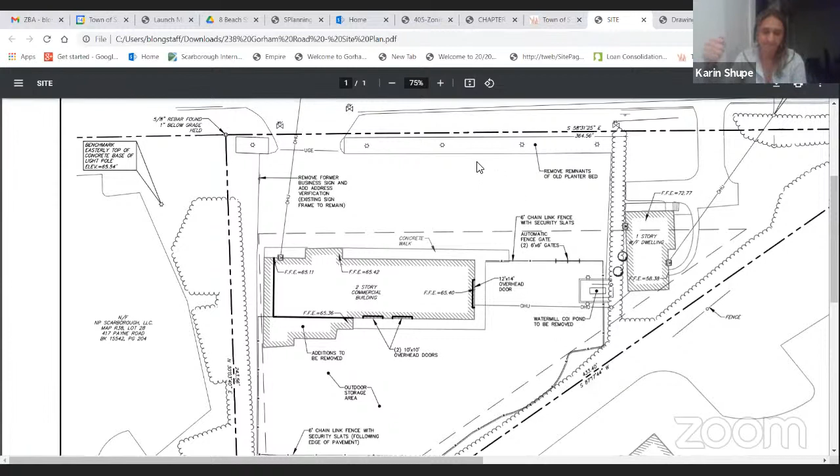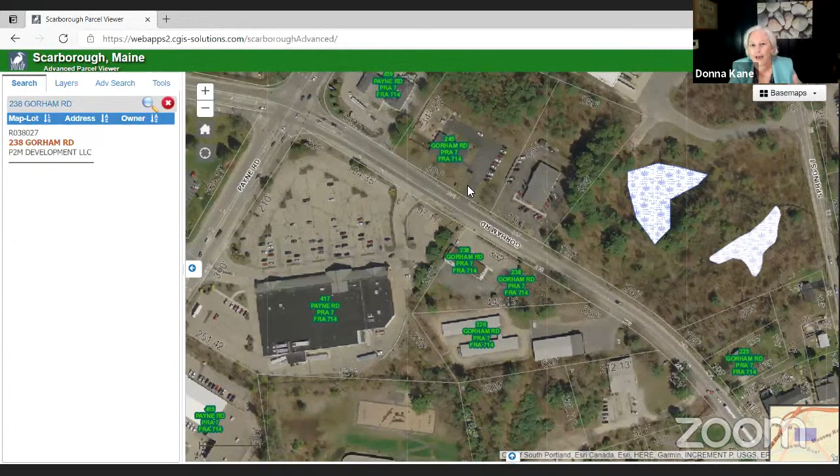Directly to the west of this is Shaw's, which of course has a lot of trucks. Behind the building is a self-storage facility, so that's got trucks going in and out of it. The next one down from that is Fillers, which is a reprographics company, and they have their own trucks as well as vehicles coming in and out of it. Across the street, there's one building that's vacant. On the corner is, I think, a Cumberland Farms. And then there's another office. That site is empty right now. And the next one down is some sort of office.

Excellent. Other questions or comments from the board members? I think I'll note as well that the lot in question that you mentioned as an office, I think, is also an auto body repair shop. Half of it's an office and the other half's an auto body repair shop. Other questions or comments from the board?

Okay. Well, thank you, Ms. Kane, for putting together a well put together application. We're going to open the public hearing and see if anybody from the public would wish to discuss this. Brian or Doreen, have we received any letters or emails with regard to this? I did not receive any letters or emails or phone calls on this. All right, thank you very much. Seems pretty straightforward. We will close the public hearing at this time.

Now we will deliberate amongst the board members on each of the standards of the special exception. Letter A: the proposed use will not create unsanitary or unhealthful conditions by reason of sewage disposal, emissions to the air or water, or other aspects of its design or operation. We'll start with you, Mr. Bork. Actually, compared to the prior use, it's reduced impact on the environment.

Thank you. Mr. Karen? Agreed, I see a reduction. It was shared that although there will be several vehicles based on the existing parking for 33, there is still a reduction. Thank you, Mr. Freilinger? I appreciate the applicant's description of the types of trucks, that there won't be idling and air pollution and that sort of thing, so I'm satisfied that this one's met. Excellent, thank you. Mr. Howe? I agree that this one is met.

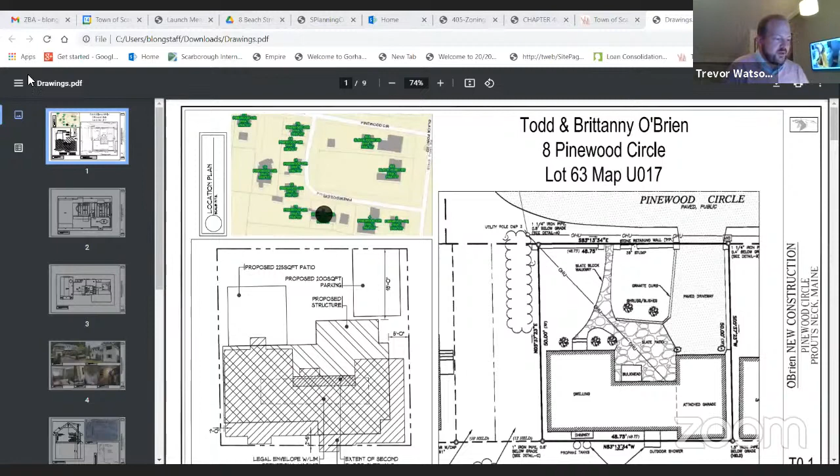Right, so Todd and Brittany have owned 8 Pinewood for about a decade now, and 8 Pinewood predates Scarborough's adoption of modern zoning. As Brian noted, it was constructed in the 1930s. As such, it's a non-conforming structure which doesn't meet minimum lot size or property line setbacks. It exceeds maximum lot coverage. It's got structural deficiencies, issues with building planning, energy efficiency, and it doesn't meet many life safety minimums, which I know aren't necessarily pertinent to the zoning, but it's all kind of a soup that this falls into.

The structure is built on a parcel which, as Brian noted, is about 1/8 the required size — about 2,400 square feet. The existing building footprint is about 960 square feet, with about 1,750 square feet of impervious coverage, which outside of the shoreland I don't know of any regulation on. We've spent some time investigating possible alternatives, including less stringent variance applications. We've looked into renovating the existing structure, and we've looked into dormer additions.

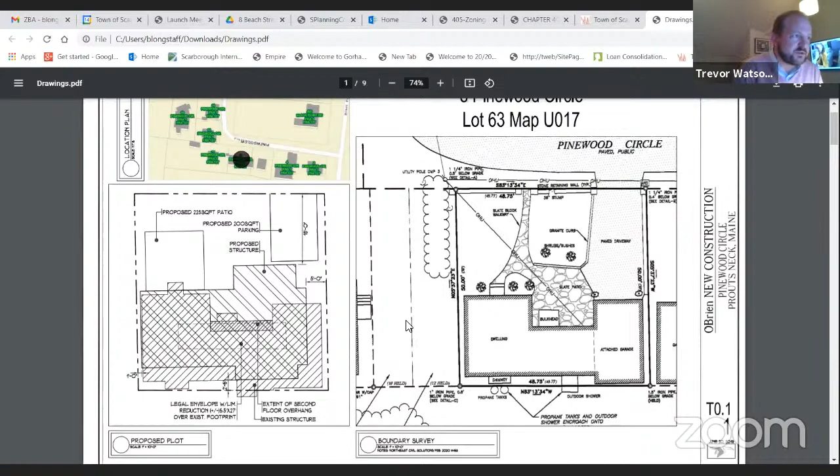There's a possibility somebody could do some deep dive and figure out exactly what it is, but for our purposes, it's basically an orphan, non-buildable parcel of land. So in doing so, we're going to alleviate some of the burden to the abutters that have developed areas to the east and south.

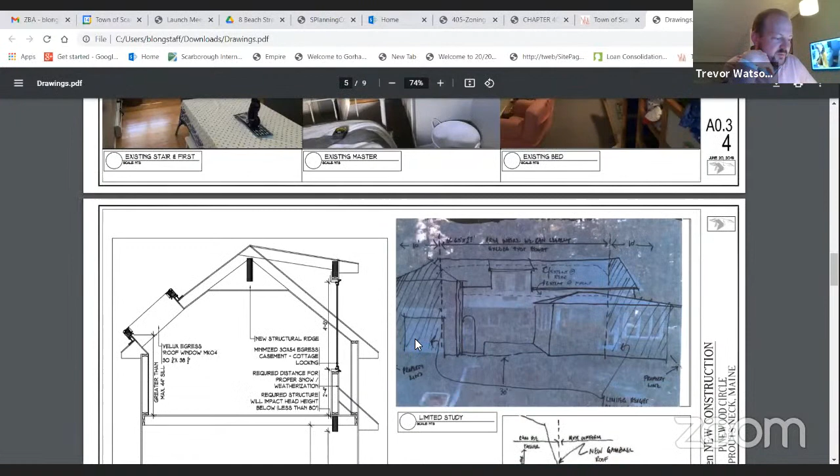Without the variance, we feel the homeowners aren't free to fully modernize the building to today's safe and efficient building practices. We think this structure was never meant to be more than a 1930s seasonal cottage, which is supported by the evidence of the existing staircase - it's like they filled in a pull-down attic stair.

The discrepancies between the inadequate foundations and the existing structure, which has no more than 2x6 joists exceeding their maximum span - the bottom line is we feel that without a new build, the serious deficiencies, which are headroom heights, life safety, minimum lighting standards, things of that nature, won't be solved for plus or minus the same amount of investment that the O'Briens would be making. So that's where we're at there.

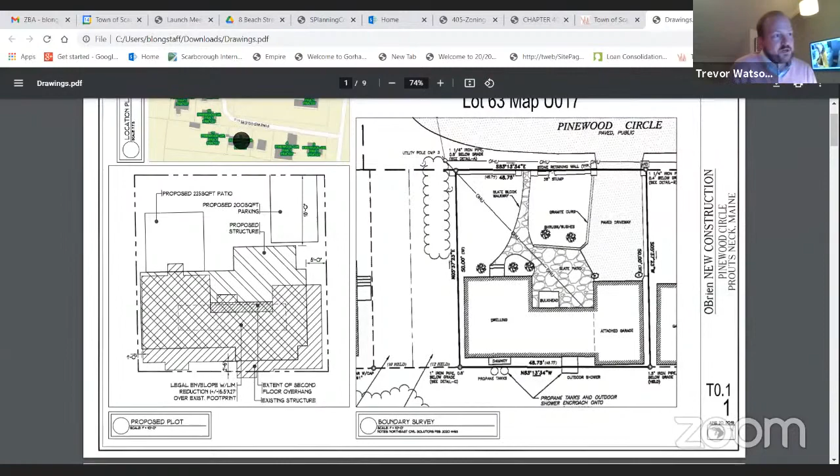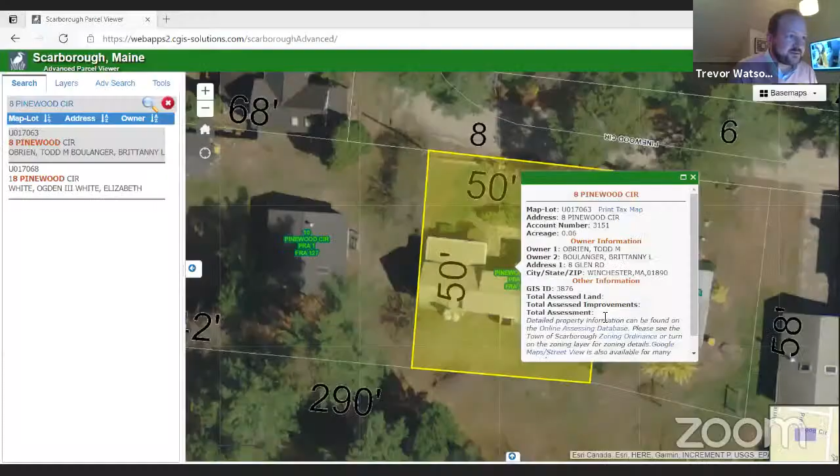Absolutely. So Pinewood Circle, as we all know, is an eclectic neighborhood that's been developed over time. What started as a 1920s-1930s seasonal community has developed and grown into a year-round community. 8 Pinewood is unique in that at 2,500 square feet, it is one of, if not the smallest parcel in the neighborhood, one of the smallest parcels in Scarborough. With no legal building envelope, I think this is pretty clearly a practical difficulty instance, and without the variance, 8 Pinewood is going to continue to become more and more of an outlier to the neighborhood.

Okay, thank you. Number two: the granting of a variance will not produce an undesirable change in the character of the neighborhood. It will not have an unreasonably detrimental effect on either the use or fair market value of present properties. Right, so 8 Pinewood is a single family residence, and it will continue to be a single family residence, so it's not going to outpace the neighborhood in that regard.

Okay, thank you. Number three: the practical difficulty is not the result of action taken by the applicant or prior owner.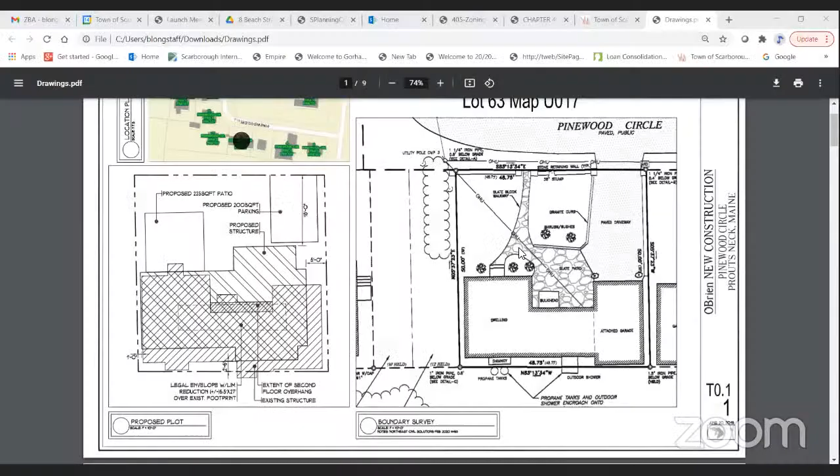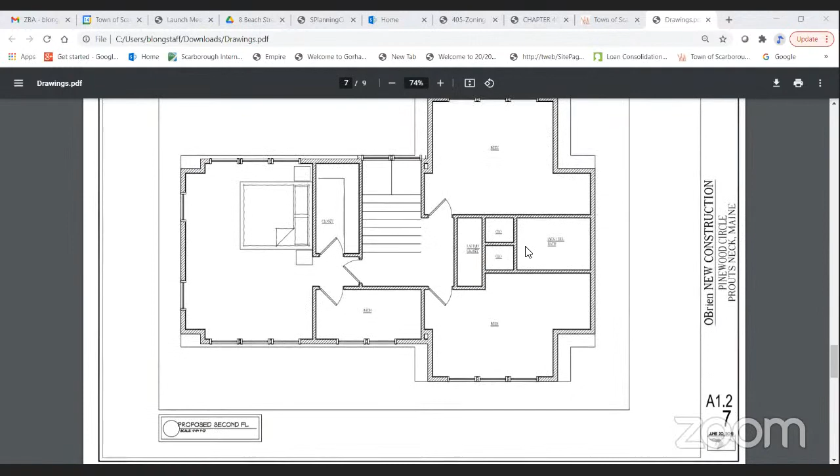The addition of a skylight, because of some of the roof lines and just intrinsically how the existing structure is built, the skylights wouldn't really alleviate any of the life safety concerns that the O'Briens have. And then the addition of a dormer, which wouldn't require a variance to adhere to the dormer rules, would require some significant structure to be introduced into the spaces.

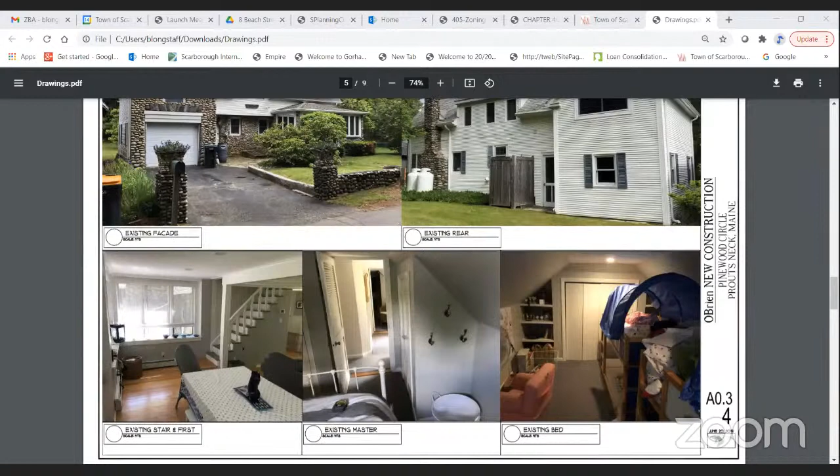And because we're not allowed to increase the volume of the non-conforming structure, any additional structure, which again would be very significant, to the tune of plus or minus 10 inches in depth to the existing 2x6 structure, would impact the existing ceiling heights and volume. So basically any addition would reduce the habitable or conditionable space, which is kind of a hardship.

So we also studied, could we design a house where we play with the roof lines in such a manner where we're hitting that critical point, which is the image in the lower right corner of the page. So if we could build a roof and get to that limited, reduced setback point, and then continue that roof up—but the allowable space created with a limited reduction isn't enough or consistent throughout the whole space to really allow this house to have any character which is in keeping with the neighborhood.

Let me look at my notes here real quick.

And then I just wanted to follow up that the O'Briens have done what they can to maintain and renovate within the existing shell, but there's nothing they can do to solve the very low ceiling heights on the first floor—we're talking about 7 to sub-7 foot ceiling heights on the first floor, and even less, like 6.5 foot ceiling heights on the second floor.

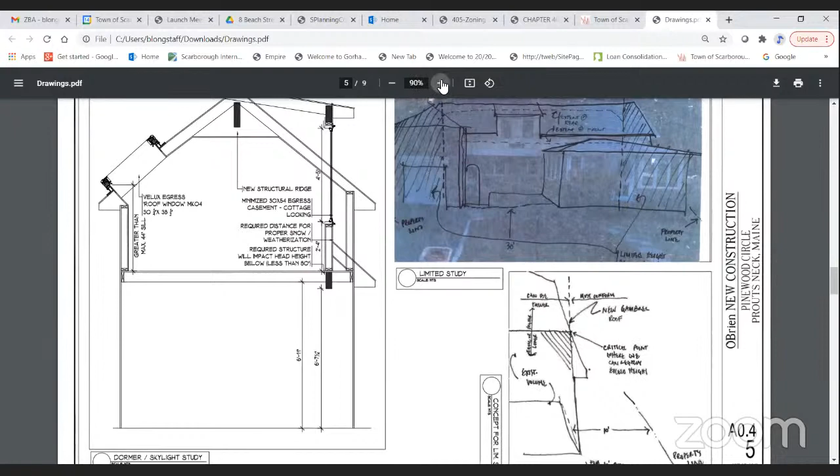They've done other things like trying to, as I said earlier, install a new boiler to try and generate enough heat, but the house has been added to so many times over the years that the plumbing—there's no really rhyme or reason as to how the lines were run—so they're running into frozen lines.

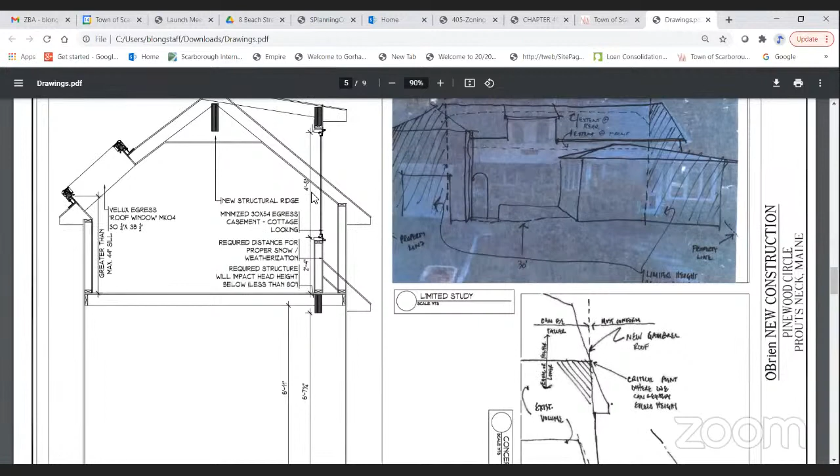Basically, we believe any renovation is going to result in reduced habitable square footage. All right, thank you very much.

Go to number 5: the granting of a variance will result in bringing the applicant's property more nearly into conformance with surrounding properties.

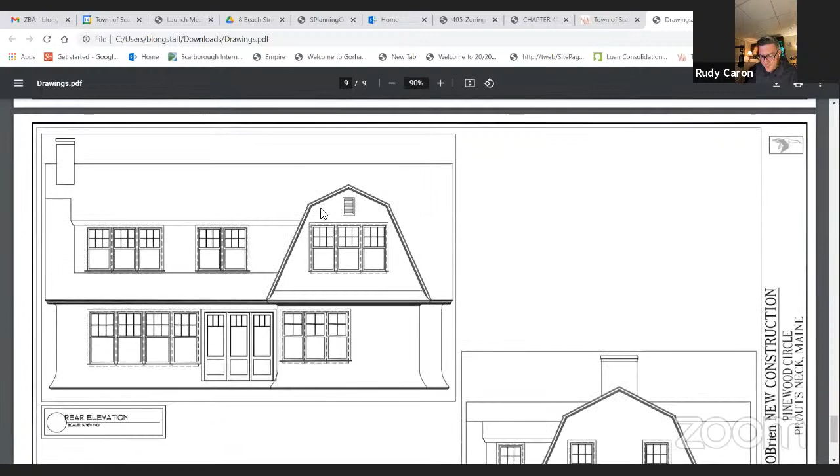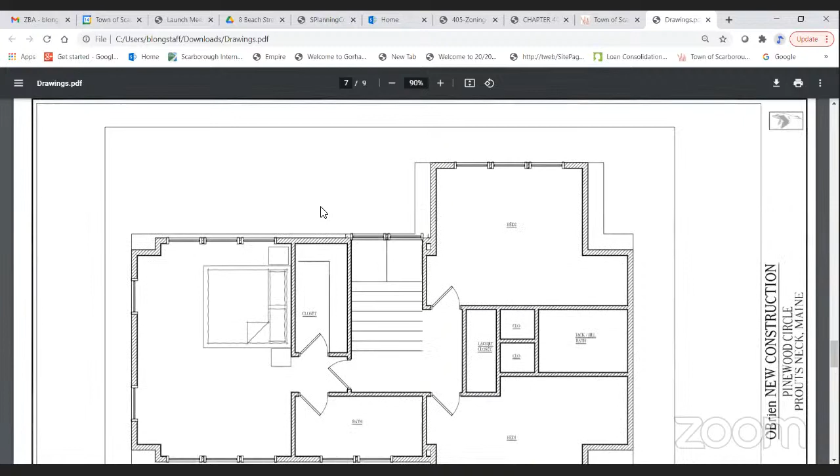Yeah, exactly. As I said earlier, the neighborhood was sort of built as a seasonal community, and through the years, people have been able to update those houses to year-round residences. We're seeing a current impressive drive for rehabilitation of some of these structures in the Pinewood Circle neighborhood. So really, the granting of this variance, we believe, will allow for a new structure to be built that will bring 8 Pinewood more nearly into conformance with the surrounding year-round properties.

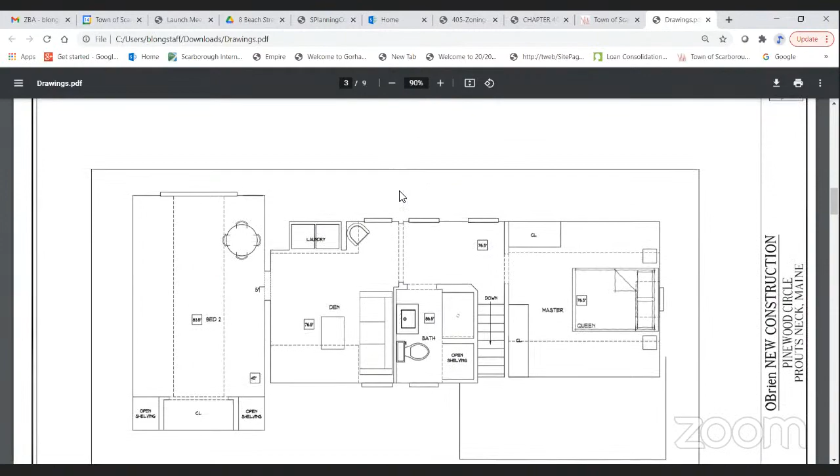Number 6: the granting of this variance will not have an unreasonably adverse effect on the natural environment. Right, so the granting of the variance for 8 Pinewood will not have an unreasonably adverse effect on the natural environment, as we're reducing the overall impervious coverage, as well as introducing more physical space between abutting structures and our own. This will allow for more drainage to happen. It'll also allow us to eliminate or properly deal with any hazardous legacy materials that exist on site. As I said in part of the application, there used to be an open cistern in the back corner of the garage that the O'Briens filled in from way back when. So it'll really allow us to improve the natural environment associated with 8 Pinewood.

Number 7: the property is not located in whole or in part within a shoreland area or flood hazard zone. Right, so I've checked the Scarborough maps, and I don't believe that 8 Pinewood Circle is located in whole or in part within the shoreland area or the current or future flood hazard zones.

Okay, thank you. And number 8: strict application of the dimensional standards of the zoning ordinance would both preclude a use of the property that is permitted in the Residential 2 district and result in significant economic injury to the applicant. Right, so the fact that there's no legal building envelope makes the introduction of any volume very, very challenging. This house is kind of quirky in how it's laid out, which is basically a result of the additions to it over the years.

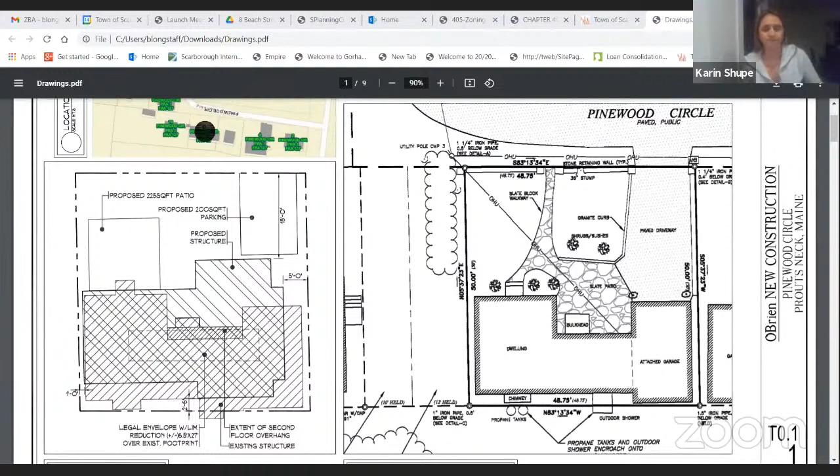Thank you, Ms. Shupe. I'll add one of the concerns I have with this property are the code issues and life safety issues with this building as it currently stands and as they've described it in this application. One note they added about skylights and dormers trying to accommodate a feasible means of egress, which really isn't recognized for an emergency point of egress. They've indicated they've renovated what they're able to.

Whether or not these continued renovations would continue to bring the building up to code and address all of these issues. I agree with Ms. Shupe, it would have been nice to see more photographs of some of the masonry, some of the foundation. Is there any wiring in there that needs to be replaced? Photographs of the frozen pipes or a lack of insulation around these pipes showing that there's issues here. Ultimately, it is a very, very old house, and the lot that they're building on really doesn't grant them much flexibility for any kind of movement here. So any kind of work that they would want to do to expand or redo this really kind of puts them in a poor position.

That being said, they are proposing a new structure that would be code compliant. And from my standpoint, I look at it from the standpoint of life safety, so I don't see any issues here.

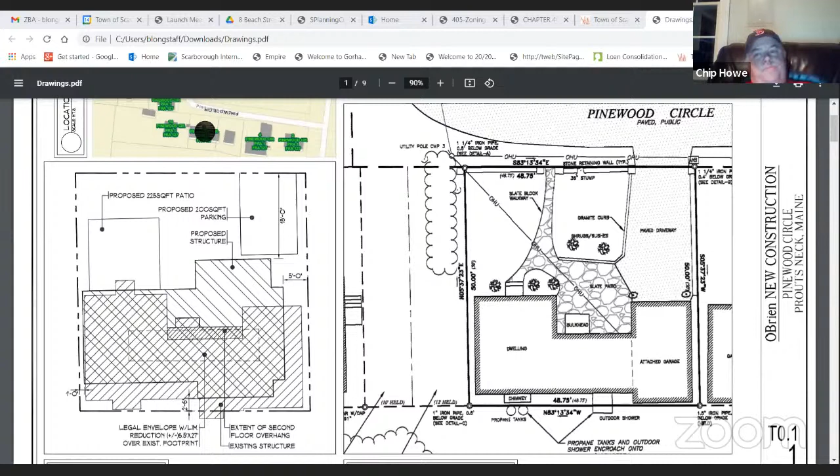Seeing that, all those in favor of number 5, Mr. Bourke? Yes. Mr. Caron? Aye. Mr. Freilinger? Yes. Mr. Howe? No. Ms. Shupe? Yes. Okay.

Number 6, the granting of this variance will not have an unreasonably adverse effect on the natural environment. Mr. Bourke?

Well, since it's maintaining approximately the same lot coverage, really the only thing changing is it's moving slightly toward that unused right of way, and on the other side it actually puts a little bit more space between it and the abutting property. I think actually it makes it better as far as the location of the footprint. So yeah, I think this is definitely an improvement.

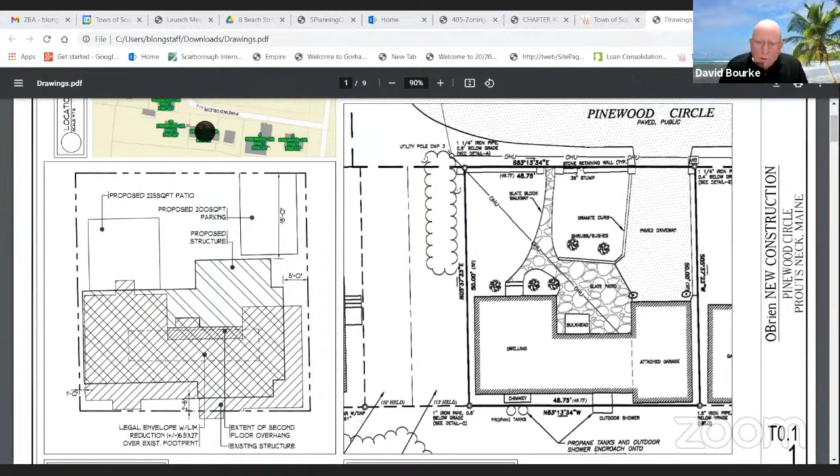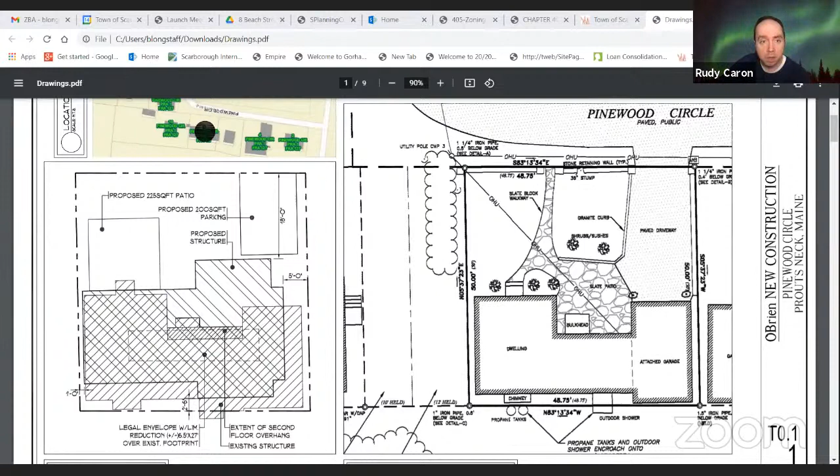Okay, Mr. Caron? Based on the information provided and the size of the existing and the size of the proposed, I agree with Mr. Bourke about the difference or delta in the two. Reduction based on the sketch shown currently for parking seems to be a reduction. There are a few trees out in front based on the existing versus new sketch that may be affected, but certainly other space on the property where new vegetation could be planted. Thank you. Mr. Freilinger?

I'd observe by updating the house to modern standards, drainage will be improved. They'll have to go through a site and soil inspection for a house that has been built and updated over a long period of time. There may be some remediation issues to address during construction. And to the earlier points, the footprint is being reduced modestly. So I think they've met the standard for this question.

Mr. Howe? I agree with the board. Ms. Shupe? I agree with the comments made by the board.

Looking at this one, the amount of impervious area looks like it's going to be smaller, so allowing more natural stormwater management through this area is a key point for number 6 in the application. We're talking about adverse effect on natural environment. Also, a house built in that time frame long ago typically used lead paint, unhealthy insulation materials, and other building materials that aren't used today, due to health factors. So I would agree that this has been met for number 6.